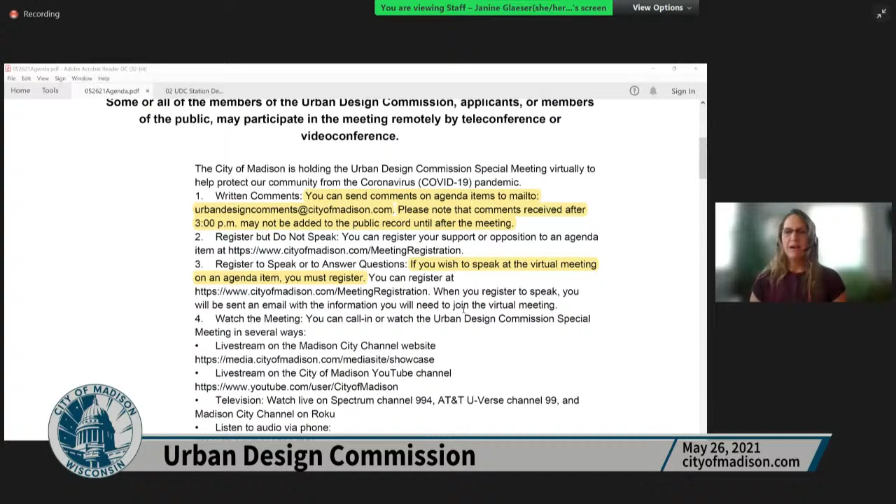At this point, I forgot to share the agenda, and I'll do that. There's one thing before I continue I wanted to tell the public: you can send comments on agenda items to urbandesign@cityofmadison.com. Please note that any comments received after 3 p.m. the day of the meeting won't be seen until after the meeting. Lastly, I wanted to remind the public, if you wish to speak on an item, try to register as far in advance as you can. We understand sometimes it takes a little more time to get logged in, but we certainly appreciate that, to make sure we can catch a registration and let you speak your comments for any particular item.

But jumping back to the agenda, I had mentioned item number 2 and 3, and item number 4 is 3330 Marsh Road. It's new construction in an urban design district number 1. Initial final approval is requested, and note that this is a permitted use, so it will not go to Plan Commission or Common Council. The UDC can make their final determination this evening.

Item number 5 is 6321 Town Center Drive. This is an amendment to a previously approved planned development, GDP-SIP, for three-story buildings. Initial final approval is requested, and a reminder to the Commission that you did see an informational presentation on March 31st. Your feedback is incorporated into the staff report. If it receives at least initial approval, it will go to the Plan Commission on June 7th and Common Council on June 15th.

The last discussion item for this evening is 216 South Hamilton Street. This is a new development in UMX zoning. Initial final approval is requested. A reminder to the Commission that they heard an informational presentation for this on March 31st, and those comments have been incorporated into your staff report. This would go on to Plan Commission on June 7th. One item of note for the Commission, there is some public comment that was recently added to the Legistar file from the Bassett District of Capital Neighborhoods. That's all I have for this evening.

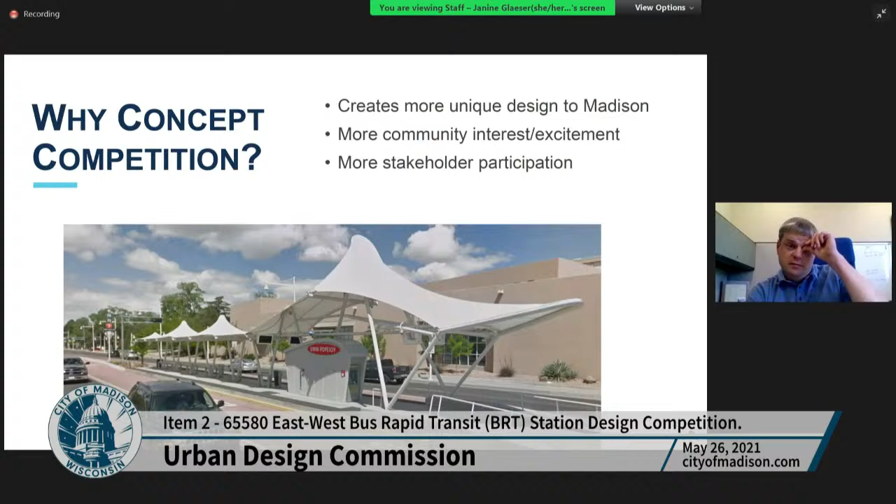So we released this back in March. Overall, we received 61 design submissions. From there, we went through a screening process with our architect and engineer to make sure that the designs could reasonably be adapted to be constructible, as well as within our budget. We did provide a budget for each station with our call for designs, and our design consultant did evaluate those and screen many out because of cost concerns.

From there, those 23 designs we did post on the website and solicited public comment. We also sent it to a couple different stakeholders, including UW and the city's Historic Preservation Department, and received feedback from them. Ultimately, the public feedback was quite successful. We had over 2,600 comments from the public, which was really helpful, and I think showed a lot of engagement in the process.

Those comments varied from 'I like it' or 'I don't like it' to more nuanced descriptions of what particular elements they did and did not like. So as staff, we compiled and assembled, based on those comments from the public and other stakeholders, a report that scored the different designs based on a list of criteria that we had set at the outset of the competition, again taking into account a lot of those public and stakeholder comments.

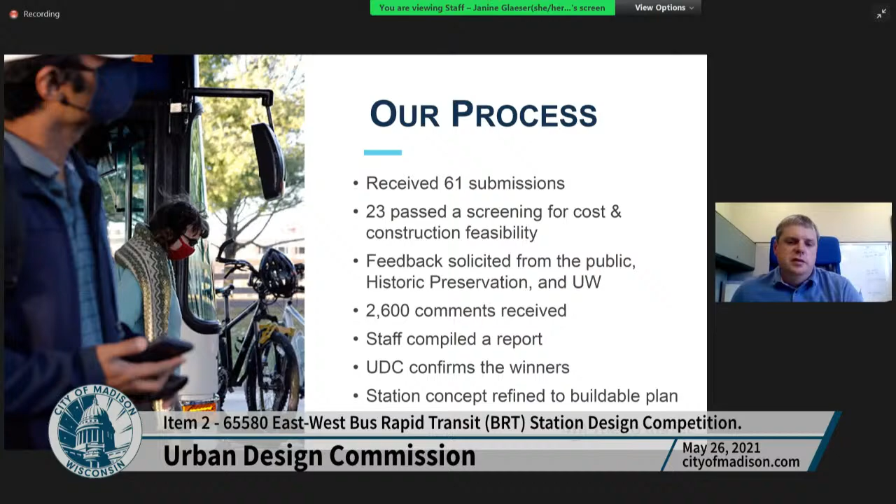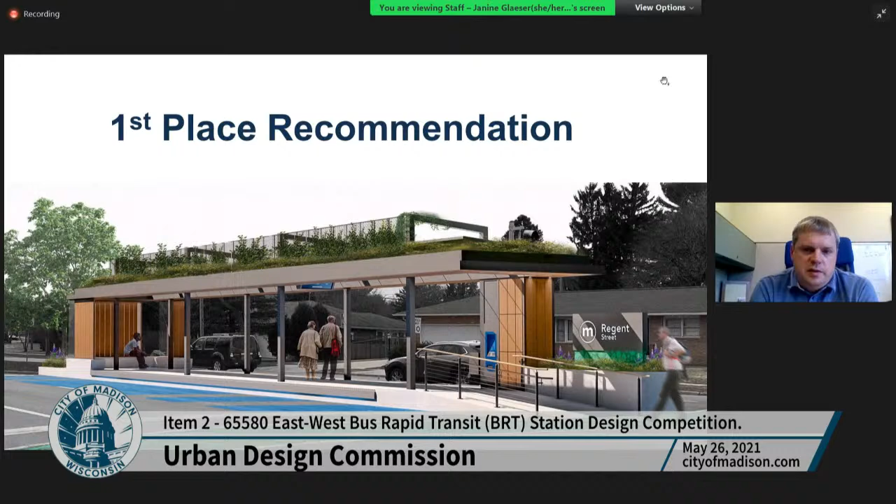So with that, I can go through the recommendations. This is our recommended first place design. Folks liked it because it was unique, especially with the roof elements and the interior elements, which you'll see in another picture. It also provides shelter for waiting passengers at the end from wind and rain on the walls.

If you go to the next one, it provides a pretty unique kind of greenhouse in the middle that allows us to place our real-time screens up there, as well as provide opportunities for public art. Both this one and another have some limitations. There's a lot of greenery shown on the roof and sides. There will be some limitation on what we can do on that front, especially on the roof, because the roof structure can only support so much, but we will try to adhere to the original intent as much as possible.

The second place recommendation is this design. If we can go to the next slide — this is a bit more simple, which many people liked. It provides nice, simple, clean lines with the wood paneled ceiling, and it's just an open concept that allows people to navigate cleanly around the station design.

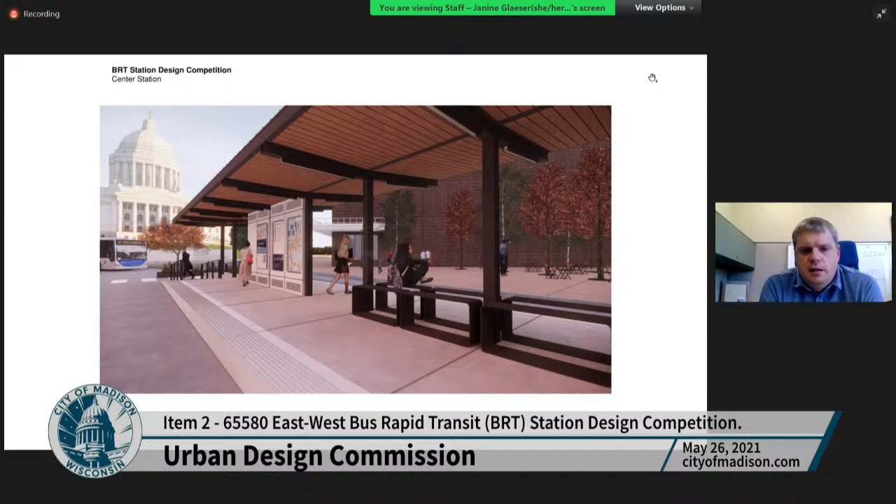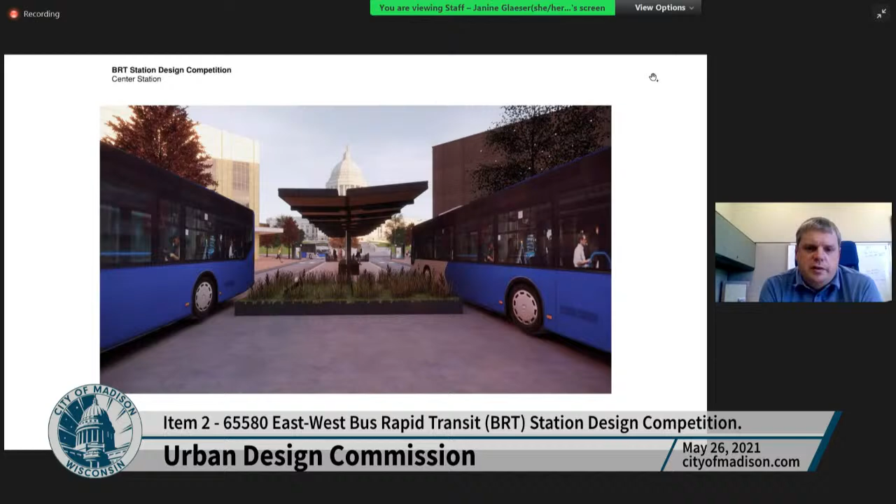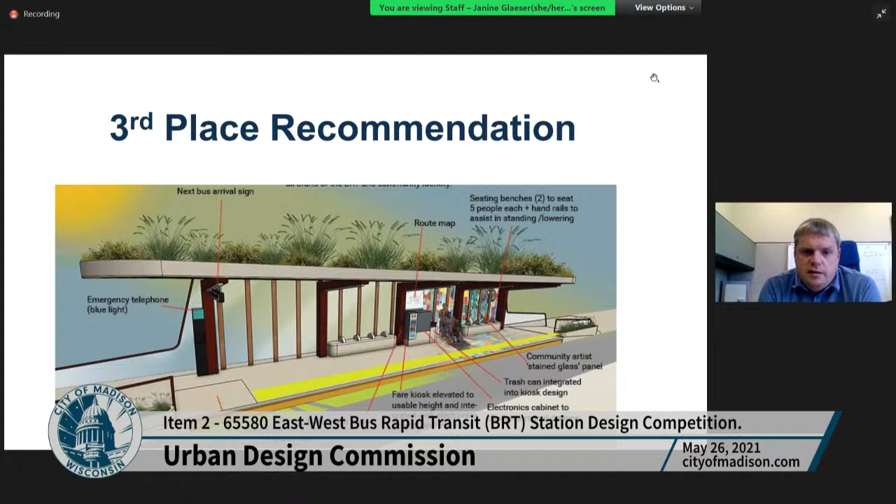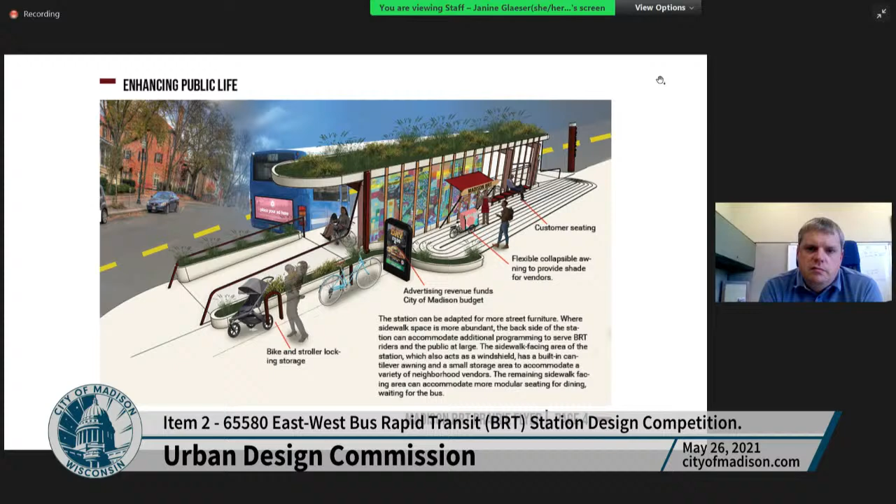Go to the next one. It does have some elements of greenery at the base of the station at the end, but nothing shown on the roof in this particular example. The third place recommendation is this one, again with green roof features and glass panels along the back that have the opportunity for community artworks. A lot of people really liked the colorful elements here and the unique shape of the roof and structure, as well as those community art panels. There are some limitations again on what we can do with some of these panels, just because of maintenance, but certainly some elements of these designs we could carry forward.

So with that, I'd open the floor for discussion, any questions any of you have, and then ultimately ask that the UDC move on a recommendation, even if it's not the staff recommendation, so that we can move forward with our design. Okay, thanks Justin. There are no more speakers registered to present, so I will ask the commission if they have any questions or comments for Justin.

Rafiq: So as I understand it, we're just making a motion for one of the three? Yeah, we can make the request that we accept the report and the order in which they've prioritized the contestants.

If you or others on the commission don't agree with that order, then we would have to discuss that and make a motion that ultimately the majority would agree with for a different order. Well, yeah, if that was the case, I just want to make sure — but I was going to make that motion, but I see another hand up, so I will wait to see what he says before I make that motion. Okay, thank you. Russell.

Any thoughts or concerns about that? There were many comments around that, and actually that was the first place recommendation here. It's a little hard to see, but it has a more enclosed end there. Essentially it's the size of one of our bus shelters and is similarly enclosed on three sides, providing some weather protection.

Ultimately, we have some physical space constraints for ADA access and maneuverability that make it difficult to enclose the entirety of the station. But as staff we feel this provides a fairly large area that would be relatively weather protected. That's a reasonable solution in this case.

Thank you. It's my understanding that when a winner is selected and as we move through these, there will necessarily be tweaks and modifications to bring it to a final design, and that will come back to our commission. I know there was some question on that, and Janine may have something to weigh in. Chair, is it all right if I speak? Yes, please.

So the city attorney did review this, and the Urban Design Commission has not reviewed other bus shelters. These are technically placed in the public right of way, whereas the projects we review are within a property boundary. Therefore it was determined that the UDC would not review the final design. However, I would be happy to report back to the commission with details on what that final design looks like, just as an FYI.

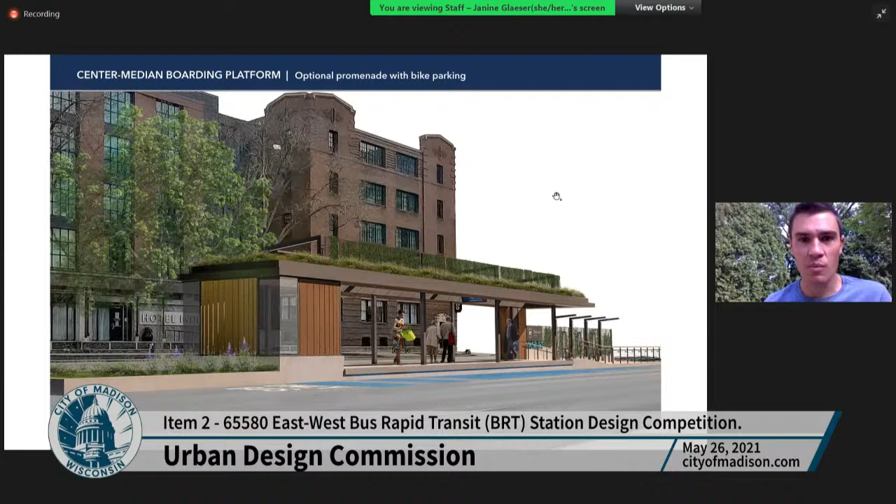Thanks, just one comment looking at the first place recommendation. It doesn't seem like the covered roof area is as deep as some of the others — there's actually a pretty significant opening through the roof, or what's perceived as the roof. I wonder if that's enough coverage from rain and the elements falling down, and maybe something to look at closer if that moves forward as the preferred concept.

Yeah, so in this case, this center area is covered with glass or some Lexan or similar material. The intent is that it's essentially a clear glass and/or polycarbonate ceiling, so it's still protected from weather but does allow light through. Gotcha, thank you.

Tom. Uh-oh, Tom, we're back to— we can't hear you. It's futile. Tom, can you email me your phone number? I had to do that. Tom, you're muted now because it was a little incomprehensible.

While we're trying to work that out with Tom, anyone else have any comments? Christian? Yeah, my first take on these ones with the green roofs was...

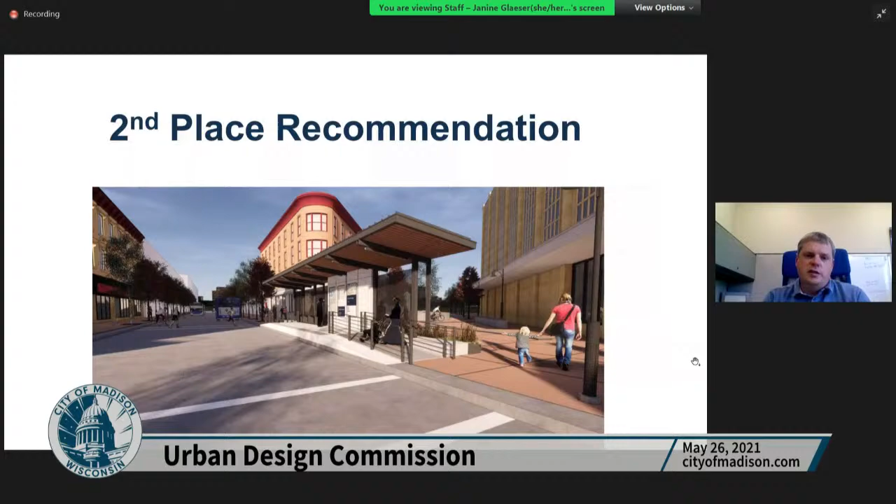When we went through and assessed these designs, so many of them had green roofs that we didn't want to screen them out just because they had one. Our general assessment was whether the green roof was an extremely integral piece of the design, or whether it could generally function in much the same way without it. In this case, we felt that was true - without the green roof there's certainly some visual change, but overall the station still functions in much the same way.

On your second question, it's important to note the stations are about 60 feet long. On the curbside locations, they're about 10 feet wide, and in the center stations, anywhere between 12 and 15 feet wide. But to your point, in almost every circumstance where we have a center platform station, there are dedicated bus lanes on either side, so there's no general traffic adjacent to those stations. That's one way we control for spray and other concerns about being close to active traffic.

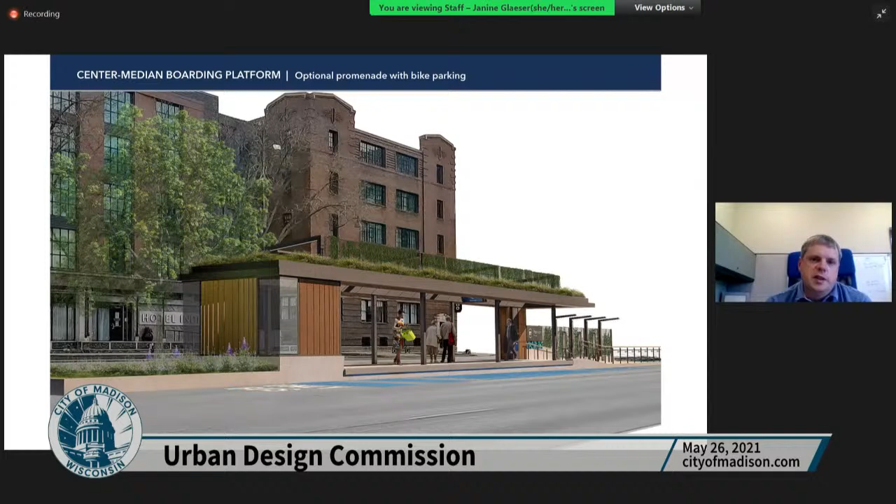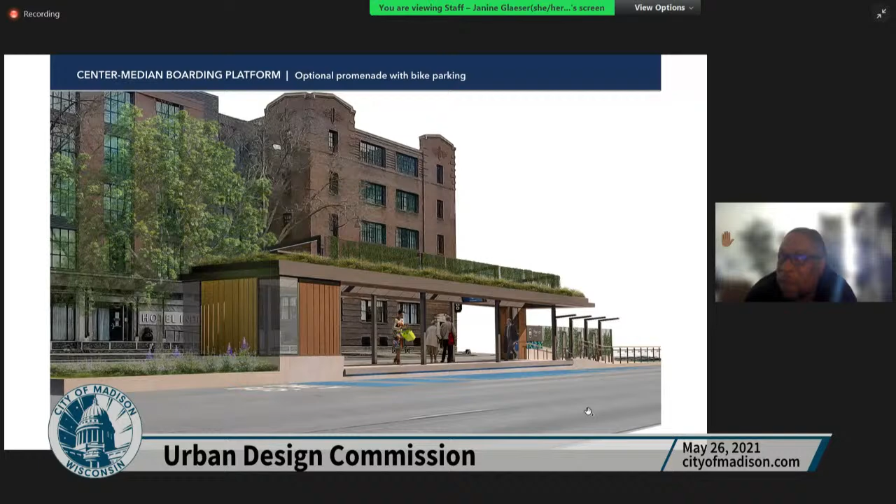Somebody made a comment about the weather and enclosures, and I think if you've ever caught a bus in Madison, rain or snow, unless it's fully enclosed, it doesn't matter - you're going to be cold and you're going to get wet. So with that being said, I'd like to make a motion to accept this report, in the order that they've done.

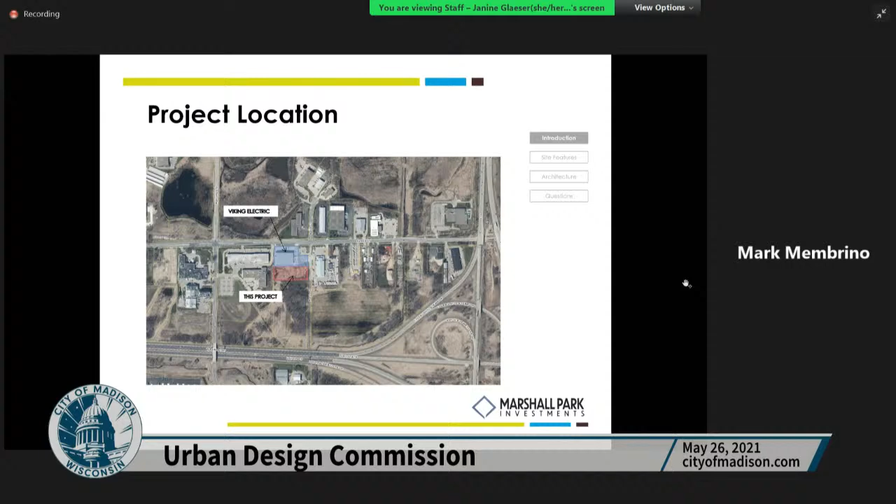Here's some recent experience. This is Viking Electric, which is directly in front of our subject site. And this is IKM, which we are finishing up. Right next to this, we're also building another industrial spec building. So we have a lot of experience in this area, although this is a new project for us.

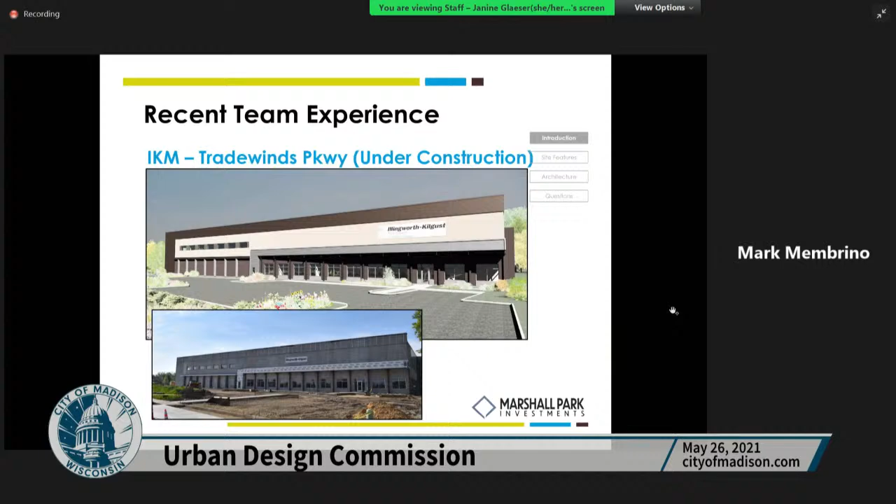So what we're trying to address here in the market is the demand for small contractors and new startups that desire to get out of their house and get into their own space. I think that's true for a lot of people these days, but this design really serves those kinds of folks.

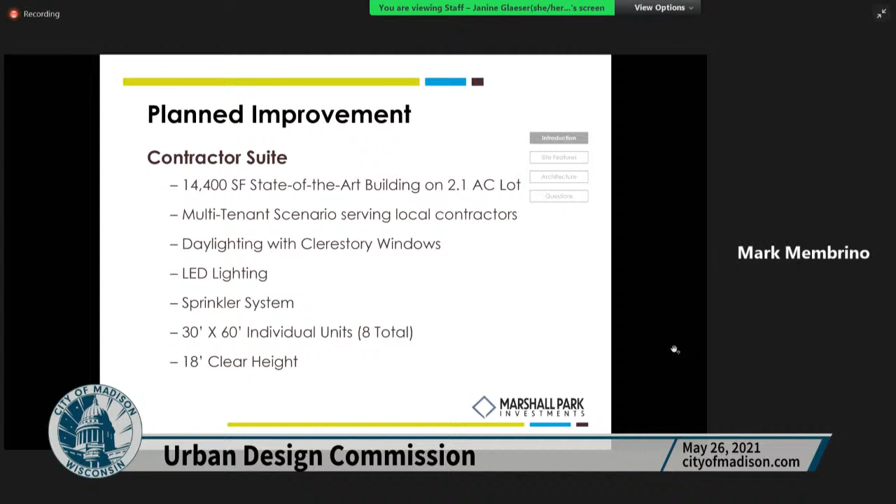It's a building that includes 8 small and affordable suites that are clean and very functional for mom and pop industrial users. We've included daylighting and clerestory windows with LED lighting to make the spaces well lit and inviting. Finally, there's clear heights of 18 feet that allow for vertical racking, and the building's protected by a sprinkler system. So all in all, we feel like we're bringing to market something that small contractors could just turn the key and go to work, with an office and a small bathroom included. I'll be followed by Gary Blazek, who will cover the site plan.

Thanks, Mark. Some of the site features: this is just adjacent to Viking Electric, just to the north, which we came to you about a couple of years back. So this complements the site. That site was split into 2 lots back then when we were doing Viking, so this is the remnant lot that we're trying to build on. This lot and the planned use hits all compliance with the zoning requirements. It's limited industrial. The stormwater features are shared with Viking Electric - I'll show you that on the site plan. We propose landscaping and we accommodate a buffer zone for the wetlands.

Here's the overall site. The top part shows the Viking Electric site, and the bottom is the 3330 Marsh Road site we're looking at specifically, with the contractor suites there. The stormwater is to the back of our proposed building, and that's shared between both the Viking Electric site and our site. There are wetlands just south of our south property line, so we are staying away from that. We're providing a 75-foot buffer between the parking lot and the south lot line so that we aren't infringing on any of that. There will be just some grading in some of that area too.

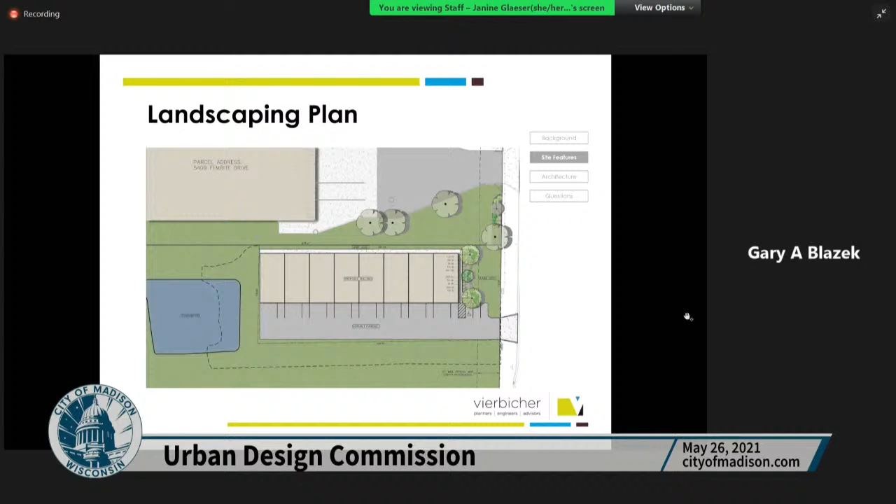In the Viking Electric site. Next slide. I think with that, I will turn it over to Bob. He'll talk a little bit more about the architectural features of the building.

Thank you, Gary. This is Bob Bouril, and we have a linear building. It's 240 by 60 feet in length, and the narrow portion faces Marsh Road. That Viking Electric building on the north end, which you saw in the previous site plan, is about 30 feet high. This one is about 19 feet high.

So we did some enhancements. It's going to be an engineered metal building construction, so we have some horizontal structural girts that wrap around the building. We're putting some clerestory windows within those girt spaces in the upper third, and that carries around the front and north facades.

Then on the south facade, as you can see in this shot, we have our garage doors. They're 14 feet. Every tenant space gets one, an office, and a bathroom, and we did a few enhancements here. We added some stone to the front, a horizontal accent band out of a fiber cement product, and wrapped that around the corner. The entry doors are going to be in a slate blue color, with metal canopies at each door. Next slide, please.

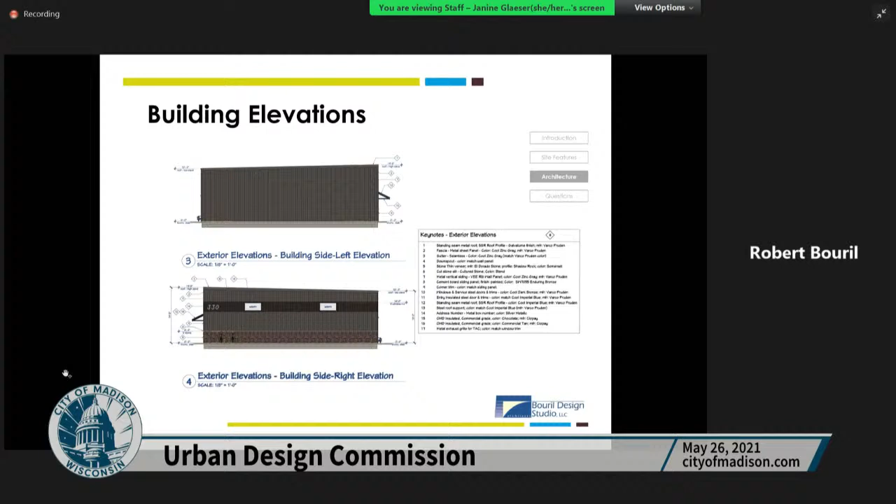Here you see the rear elevation, which faces the stormwater retention area, and then the front that faces the road. It's a mono slope, so the water pitches to the north end and is captured and goes back to the stormwater area. Next slide, please.

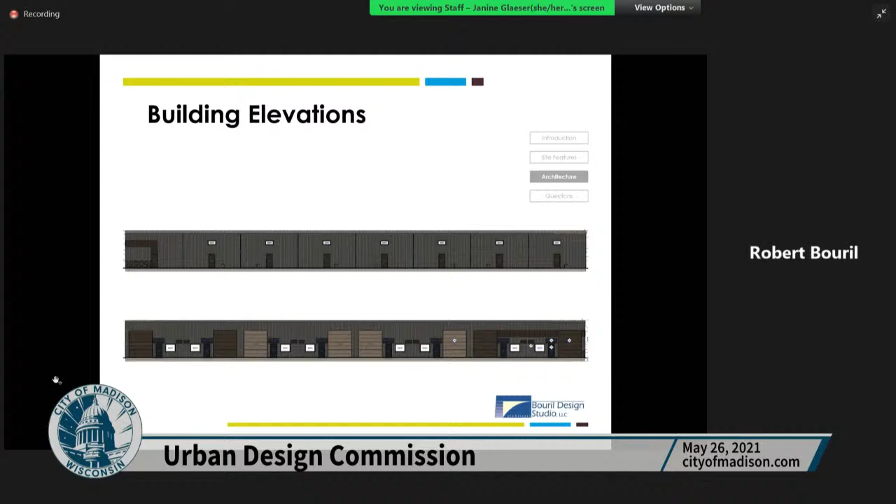The north and south elevations. There's an exit door for each tenant and clerestory lighting on the north, and then on the south we have our garage doors, main entry, a little bit of color change with the garage doors just to break up the facade. And next slide, please.

Let's see, let's keep going. Okay, just more of a people eye view. Next slide. This is wrapping around to the north end. This is the facade that faces the Viking Electric building. Next slide.

Here's the south elevation. Basically, there's contractor parking, turnaround, loading and unloading space here at the garage doors. Next slide. Another view. Next slide.

Front elevation. The landscape plan is per the previous one that Gary had. The Viking project's going to have some Kentucky coffee trees on the north side of this building, and then this gets an assortment based on that landscape plan. Next slide.

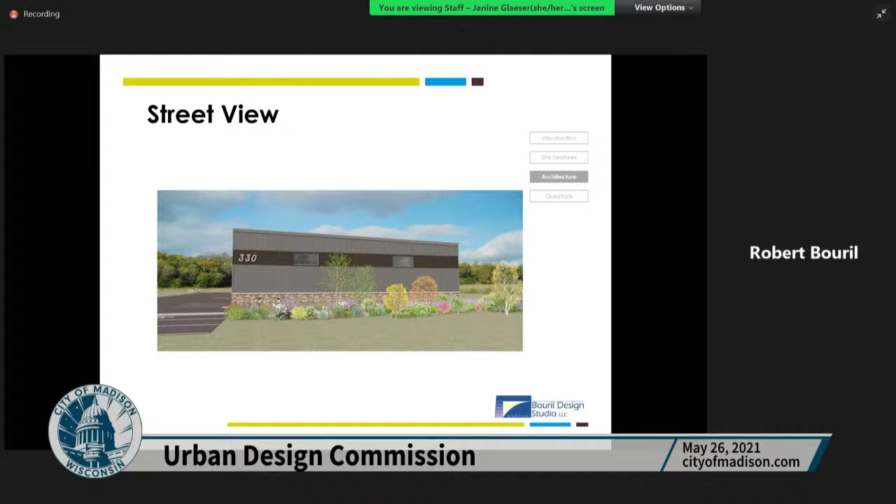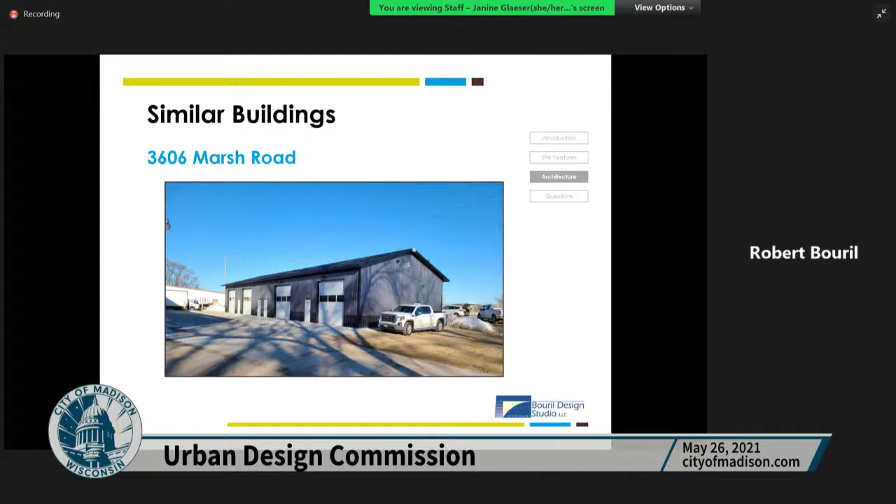These are a couple other projects that have been approved in the same urban design district. Next slide. Another project that was previously approved. Next slide.

Our colors for the garage doors, we're keeping with just a fairly muted, warm color scheme, the chocolate and the commercial tan. Next slide.

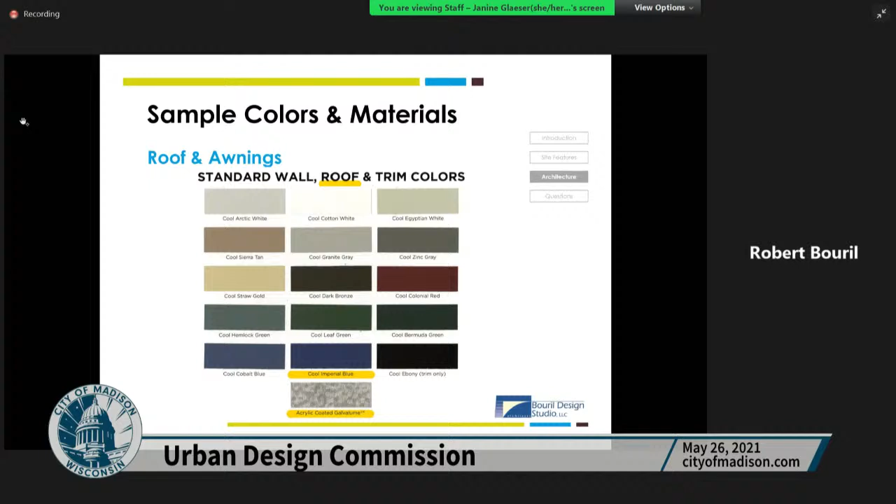The roof is galvalume. That's really not going to be visible from the street. Next slide. And the cool zinc, here's an example.

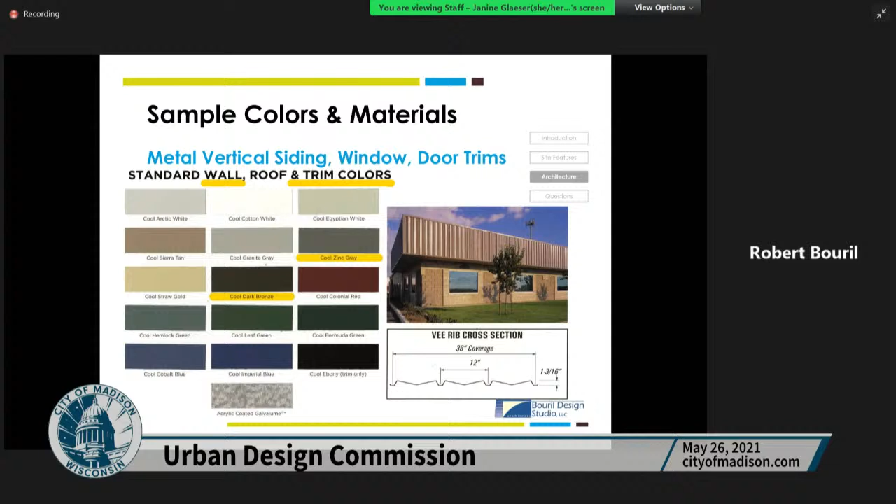It's a deep V ribbed metal panel. It's got a lot of shadow line with dark bronze trim. Next slide. Here are the actual colors.

All right, there are no other registrants to speak, so I'll open it up to the commission for questions or comments.

Russell. Thank you for the presentation.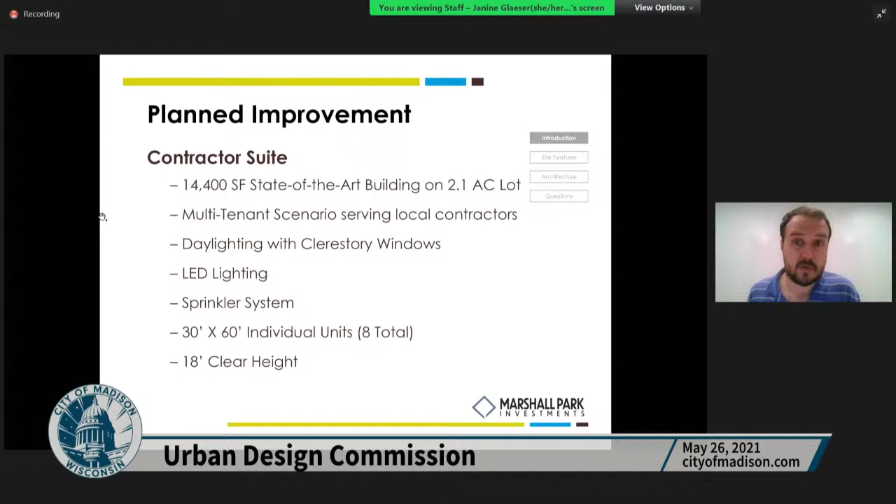I think your treatment of the building, the materials, and the design for this type of building looks nice to me. I think that was careful selection of some of those elements. A couple of things I would like to see and understand is the integration of existing mature trees on the site into the landscaping plan. The last time I took that interchange, there is still some buffer out there from the interstate from a lot of those trees. So I think they're an asset that the project would get value from keeping and integrating.

The roof plan isn't very clear on this project. I would imagine there are rooftop mechanical units, and the drainage from the roof is not really clear. So I guess those are just some items that I think we'd like to see in a final presentation. Thank you.

Okay. Any information you can share with us with regard to trees? Because they are asking for a final approval tonight.

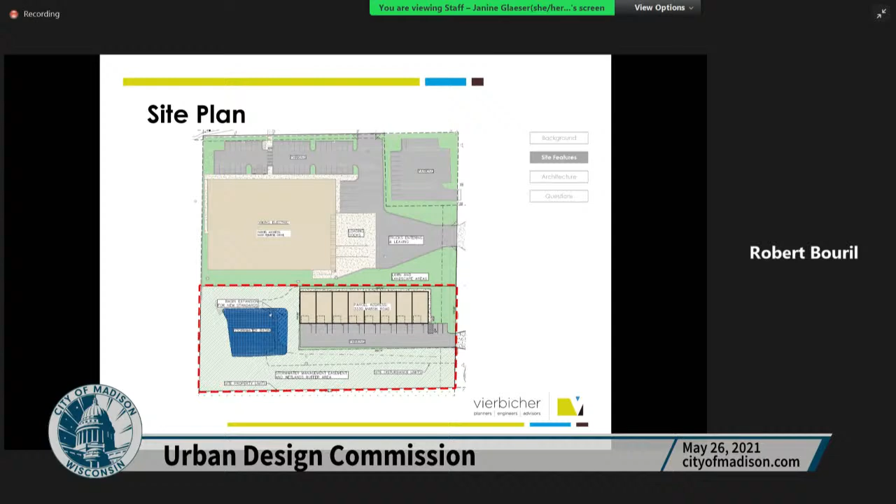I can address the roof design. This is Bob Bouril. Can you hear me? Yes, go ahead. Okay, so there will be no rooftop units here.

Each individual space will have a wall-mounted gas unit heater internally, so basically we'll have a side vent going to the outside on the side wall of the building. So nothing up on the roof.

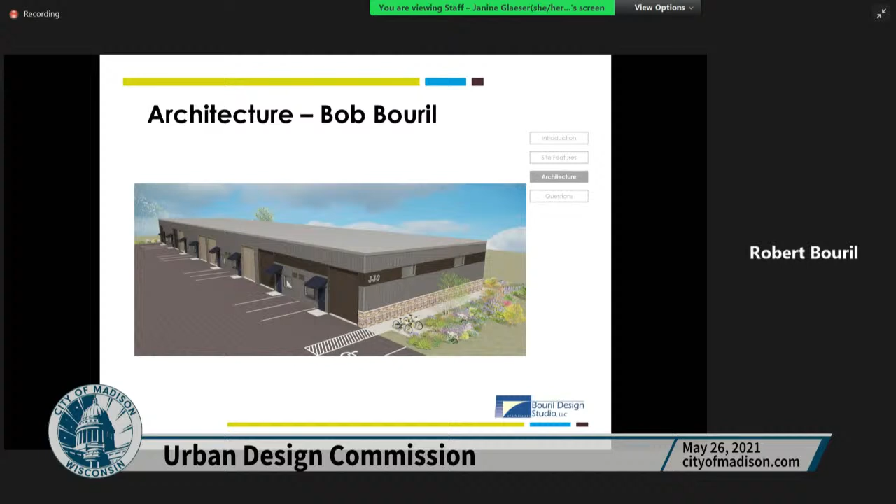Yeah, just to address Russell's comment and close the loop, although I don't think the species were documented in the submittal, it did appear like most of the existing trees were willows and not of significant value like we've seen in some of our recent projects before UDC.

Thank you. I'd like to, before I call on Christian, make sure the commission brings their attention to the staff report and Janine's request that ultimately for approval, we would need to make a finding that metal panel in this case is an appropriate use of materials on this building. You can see a little more explanation on that in her staff report. Christian.

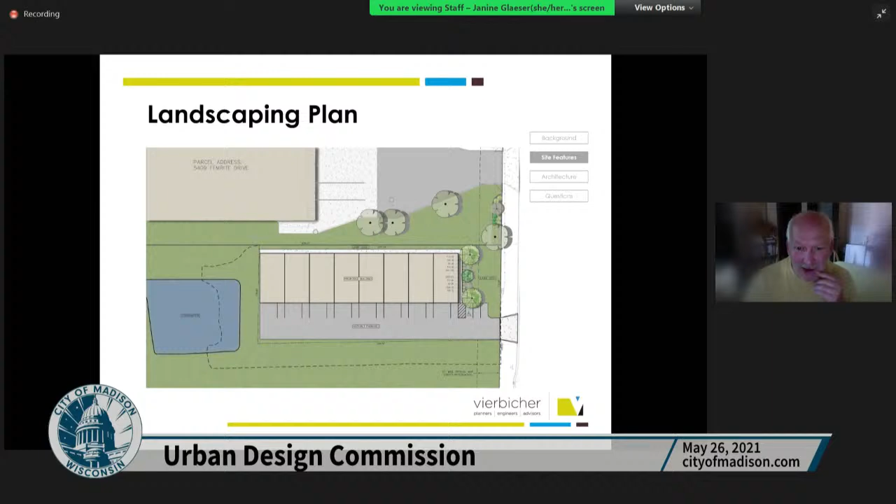Yeah, just to follow up on the drainage questions, and forgive me, I'm not an architect, I'm not quite as adept at reading these plans, but it looked like there were dedicated lines that came from the Viking property and fed into this stormwater basin. I had trouble parsing that out on this project. And I wondered for the parking lot, what is the nature of the drainage to that stormwater basin?

Is it just gravity, or is there sewer lines in the parking lot feeding into the stormwater basin, or are we letting the slope and direction take care of itself?

Yep, this is Gary. The parking lot will drain from the building to the south, and there will be a swale designed to catch all that water - essentially a small ditch that'll drain it back to the stormwater basin. That'll help with water quality, all going through vegetated swales and vegetated grass down there. So it's really a simple system: gravity sheet flow off the parking lot to this swale, and then the swale back to the basin.

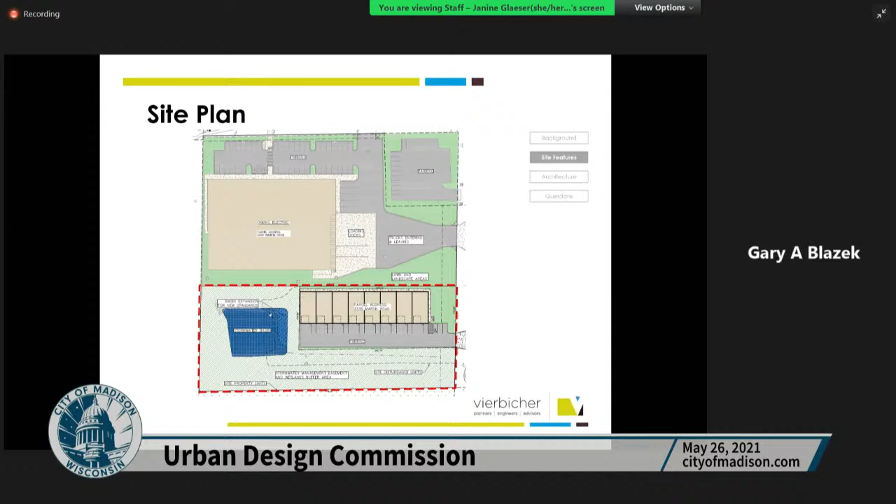Okay, I had one other question on the building. You talked about the natural light and the clerestory windows, but I was curious why there isn't any on the west end of the building. It seems like that unit is really getting short shrift, and all of them in general. The one closest to Marsh Road is going to get the best light, but the windows on the north side are so small. Is it just cost prohibitive, or just not felt like it was needed to possibly have something on the roof? That seems like the obvious place to let the light in.

Sure, I can address that, as to our design thoughts on that. If you go to one of the perspectives where the contractors enter the building, each contractor will have an office, and we provide a sizable window into the office. That's really where they're going to be spending their time. The back could be shop, warehouse, storage, but every unit does get at least one clerestory back there, even that west one. So where people spend the majority of their time, they will have a large office with a direct view to the outside.

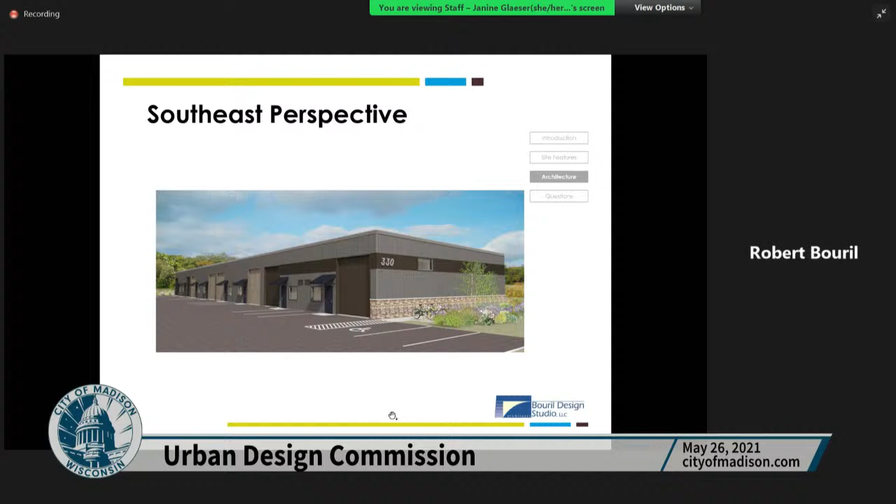Well, there is a precedent for other buildings that have been approved that are similar type construction in this district. I guess we're being asked to make a comment on the part of the UDD acceptance of metal panel as exceptional design merit, and I think we've made that finding in the past.

Chair, may staff jump in? Yes.

So kind of just repeating a little bit of what Cliff already said, this is the current text as it exists in the Urban Design District guidelines. The commission has found in previous projects that metal panel is acceptable, but it is up to the applicant to provide some reasoning why that is an important part of their design and why it makes it successful. Staff did work with the design team to look at some alternatives to add more variation to the design, so the commission can make a determination that it meets the exception or not. It's up to you.

So then my follow-up question is, I understand that, and I'm not saying that this does or does not work or should not pass, but the exceptions are based on exceptional design, and this program or this type of building doesn't lend itself to exceptional design. It is what it is - it's a rectangle with some garage doors, right? So perhaps it's within the context of Urban Design District 1, an industrial area. Food for thought.

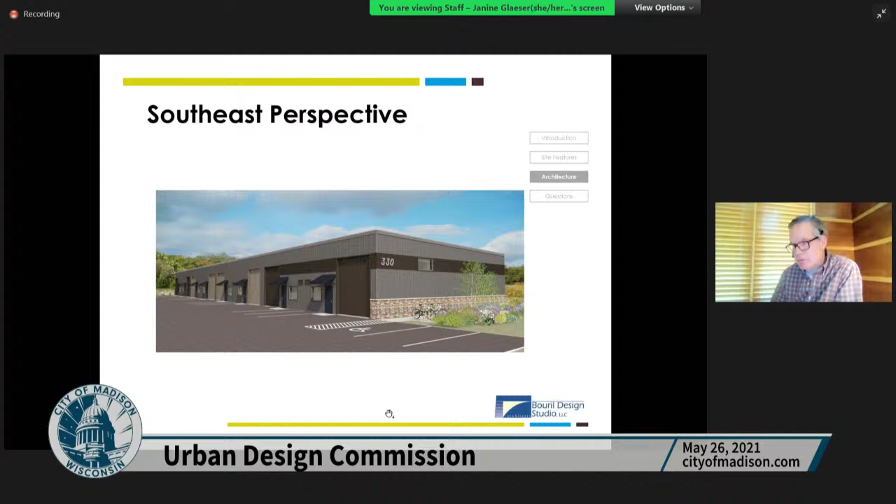I believe we have, if I'm not mistaken, Janine approved a few on the side of the Beltline in the past few years with metal panel. Is that correct? That is correct. There were some previous examples. I can forward those slides that showed something similar.

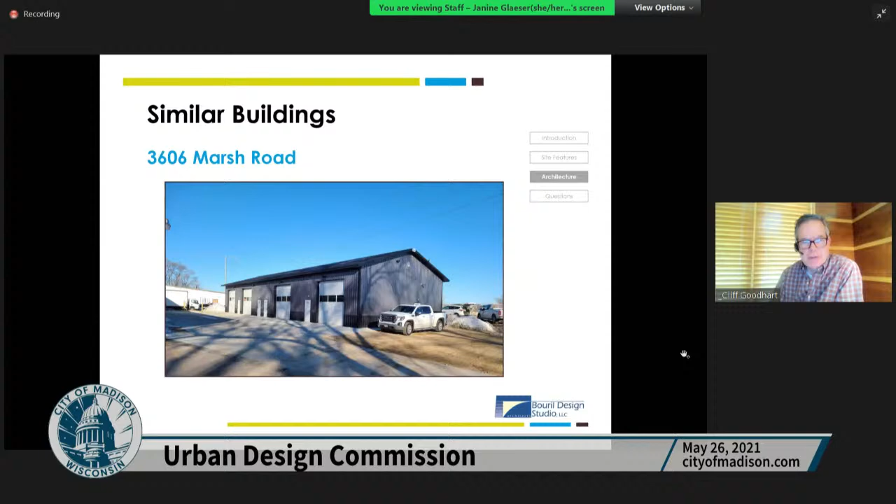Yeah, and if you look at the previous examples, I guess I would say that the project before us is a little bit more true to an industrial building use, and it's a little bit more honest than some of the agricultural and sort of residential forms that have been approved in the past. This is kind of a nice, clean industrial building. While I have the floor, with the exception of that rusticated stone base, which is driving me nuts. And I think that if you're going to do something like that, it should just be a dark gray stained CMU or a dark brick or just metal panel.

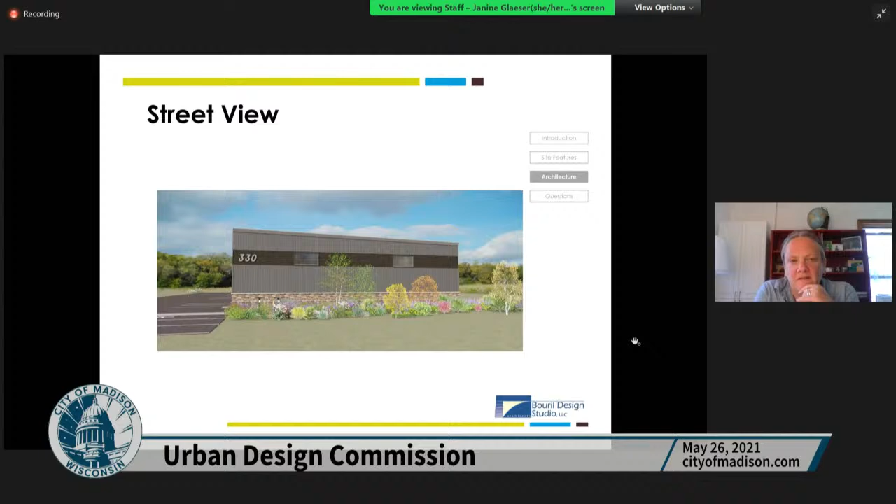Let's see, Jessica and then Lois. Yeah, I wanted to say that it looks like the detailing with this system is nice. The way it's trimmed up at the top and on the corner in that elevation we were just looking at. I did have a question about cars parking so close to that metal panel then, if you're going to buffer that a little bit, or if you have experience with how that metal panel meets the ground, where snow might be shoved or cars come pretty close to that window. Just curious about that. If you've used this panel before and you know how it withstands that.

Yeah, there'll be bumper guards for the tires in front, so they obviously don't run into the panel. The foundation will be poured a couple inches higher to protect the panel at the base. It's a durable product. It's all framed in steel, so we don't have to worry about wood plates rotting and such.

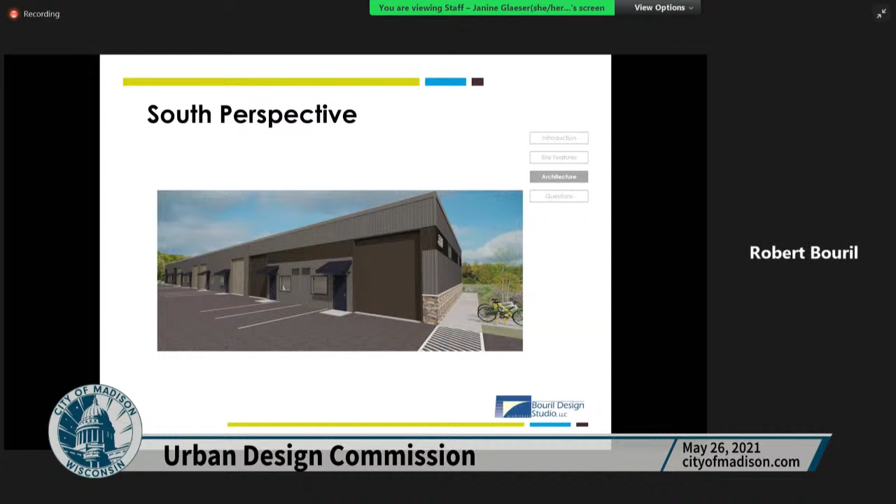Okay, is that it, Jessica? Yeah, thank you. And by the way, we'd be happy to entertain looking at a different masonry product. I'm totally open to that. Yeah, thank you. I think this rustic material is just not appropriate for a nice, clean, industrial-looking building.

Lois, and then I see Rafeeq's back. Thank you. I was going to bring up the stone base. I was thinking more on the lines of a burnished block would be really nice and a dark color. I think the metal panel is appropriate to this site. And I do agree with Cliff that just kind of plain rectangle feels more modern and appropriate in design than the gables and everything that was in some of the other examples you gave.

The thing that Jessica brought up, I was going to bring up as well, but more about salt. When you have a parking lot right up against a steel building, one of the things I think we want to ensure is that the building is going to remain looking nice for a decade or two. And when you're salting near a building like that, that's what's really going to eat up that steel. So I'm happy to hear that you have a little buffer there. And I would almost encourage you to run your masonry along the entire base if it's a real simple masonry, if that's possible, just to make sure that you're not going to have any salt hitting that steel. But I think that it's a perfectly appropriate location for a steel building.

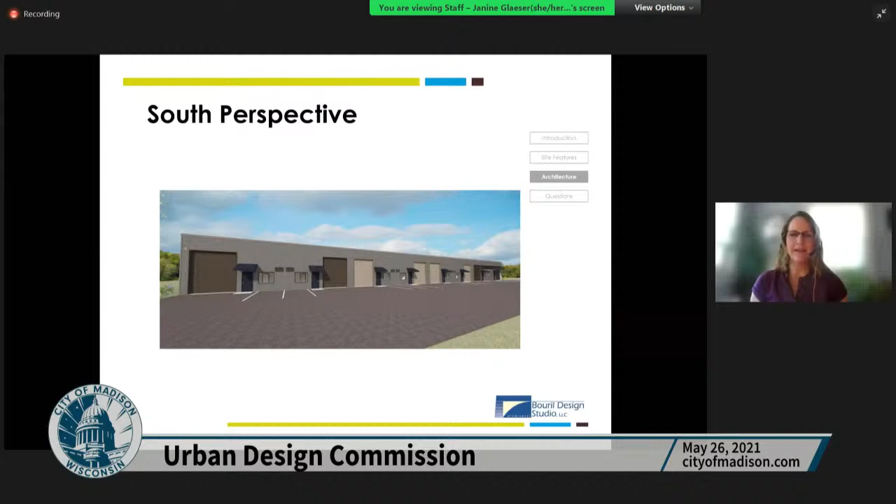The question was about design merit, whether or not the metal is appropriate. My response was that you cited the text as it exists right now in Urban Design District 1, and I was mentioning to the commission to keep in mind that Urban Design District number 1 is very industrial, and to consider those design merit standards in the context of an industrial district. Thank you, I hope that helps.

Any other questions or comments or motions? Well, if that's the case, I'll make a motion since I'm still unmuted. Yeah, you're still unmuted, go for it. I'll make a motion for approval.

Any conditions with the approval? Yeah, I got kicked out so I missed some of those conditions, so I'll let Lois state them since she had the second. All right, Lois, if you're going to second it, I will with some clarifications.

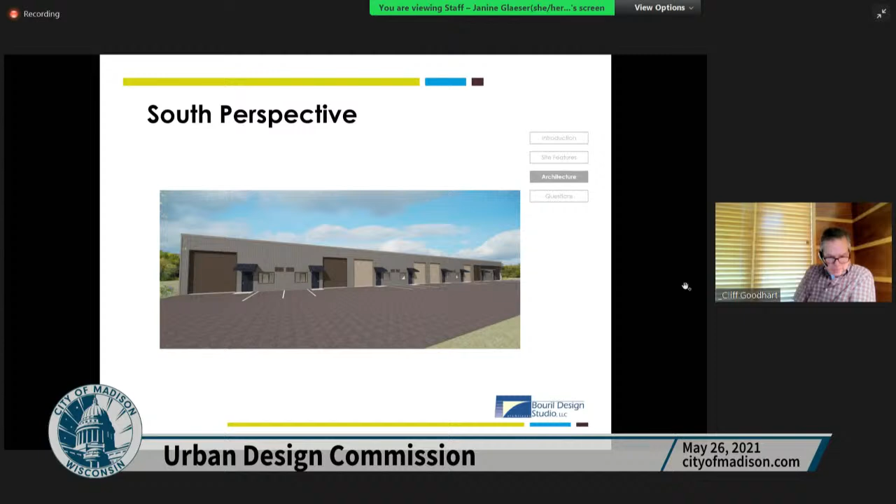Asking for the alterations of the stone base to something simpler and more appropriate to the site and architecture, masonry, and consider—I know the rendering isn't showing it—bringing the steel off of grade a little further than you have it. I don't know how many inches that would be, but just enough that you won't have degradation of that steel from all the salt on that parking lot. Potentially, maybe even bringing the CMU across.

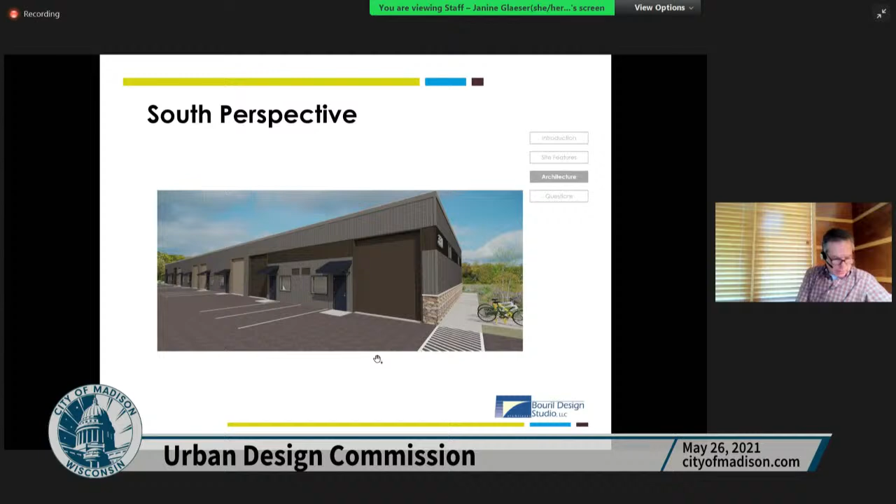Any discussion on the motion? Okay, if I don't see any hands raised, then by unanimous consent, final approval as requested has been granted. Thank you very much.

All right, now we're up to unfinished business. Item number 5, 6321 Town Center Drive. This is coming back to us following an informational presentation we had a couple months back or so.

Thank you. The development team is ready to present on behalf of Kevin Burow. And Kevin, I'll have your slides up shortly. All right, thank you very much.

Good evening, my name is Kevin Burow with Knothe and Bruce, and we are presenting to you tonight for final approval the revisiting of the PUD previously approved for the Town Center Drive area. The site is located directly on Metro Terrace and Town Center Drive, across from the Town Center condominiums and just south of the fire station.

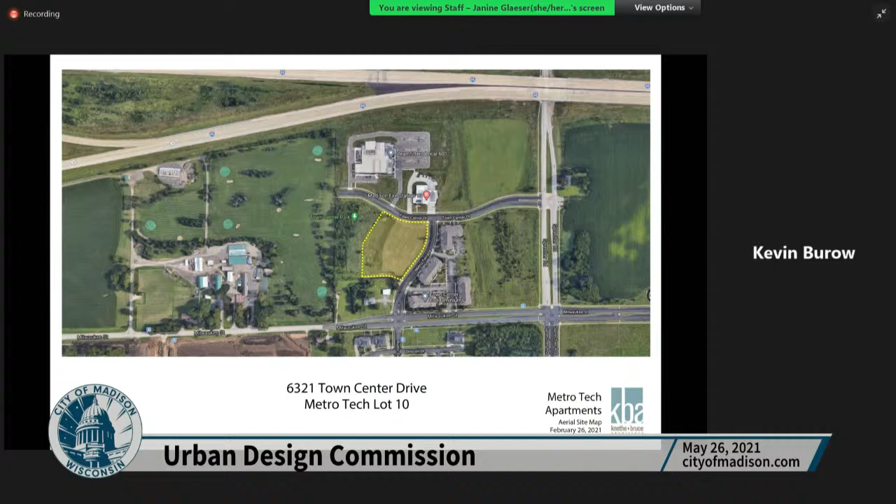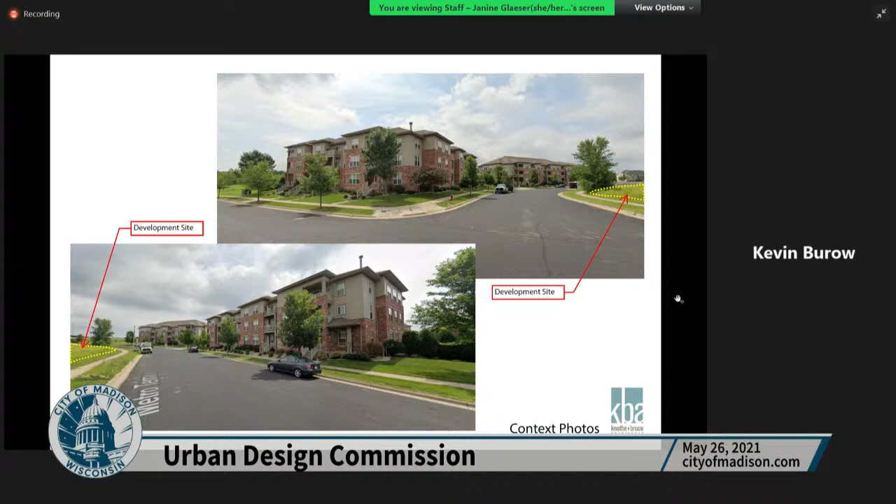The context site images, as presented last time at the informational meeting, show we are surrounded by the condominiums on one side, and the fire department directly across the street. It's currently a vacant field area where we are proposing this development.

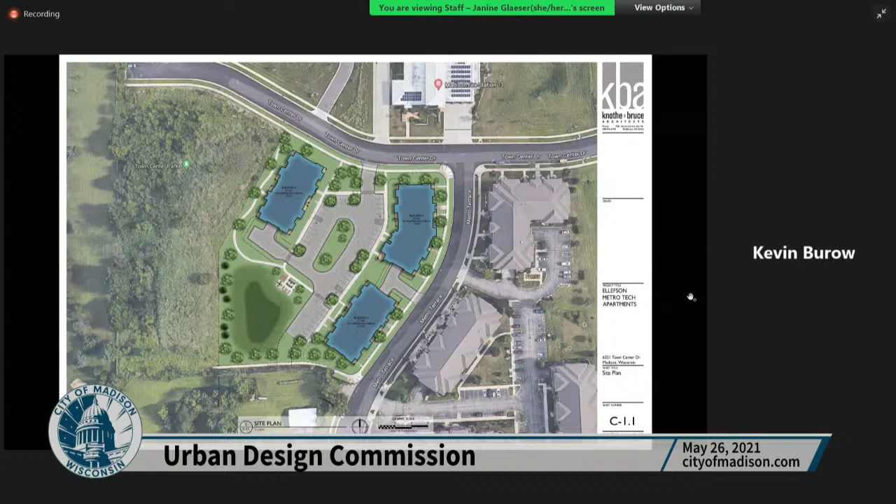As far as the exterior goes, we took your comments into consideration and revised it. Where we originally had brick running up into the gable elements on some features, we've lowered it all down to be consistent, so there's no brick riding up into the gable—it's a much more cohesive image than what you see here.

On the next slide, the main entry feature, shown in the upper right-hand corner, has also been redesigned—we've created a colonnade element with a roof over it and an archway, and added wall sconces on each side, making it a unique feature for each building that signifies the entrance. Just as a reminder, all the entries are located on the interior of the property around the drive areas, not along the sidewalk areas.

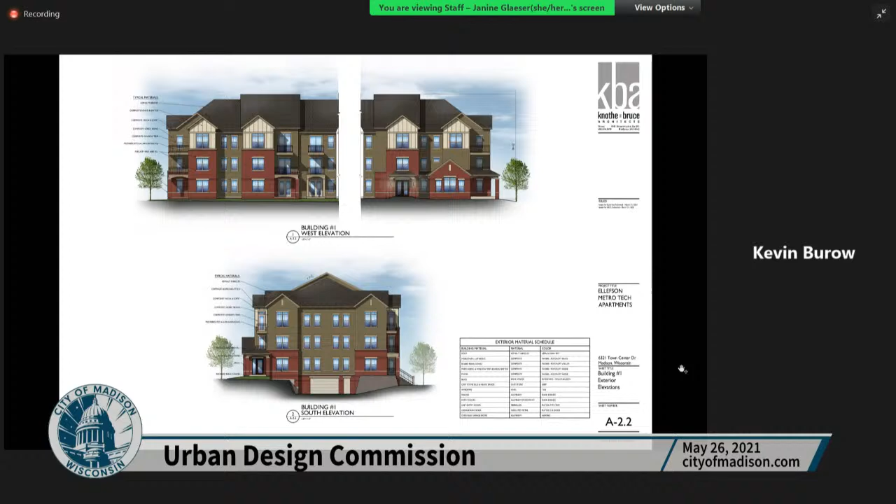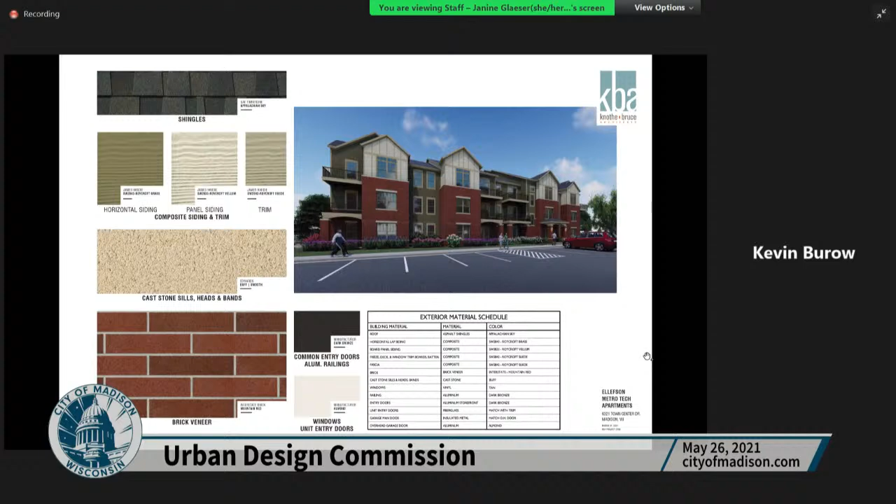So the exterior material palette, as presented last time, is asphalt shingles on the roof, then 3 different colors of composite siding for the siding elements and trim, cast stone base, and a reddish brick veneer, which has a multicolored palette to it.

Next slide. So these are the images along the street, along Metro Terrace, where you're looking at building number 1. These are all private direct entries into units, and there's a stairwell that comes down, which you see the 2 people walking up to. That's not a public entrance, just a resident-use-only exterior stair access point.

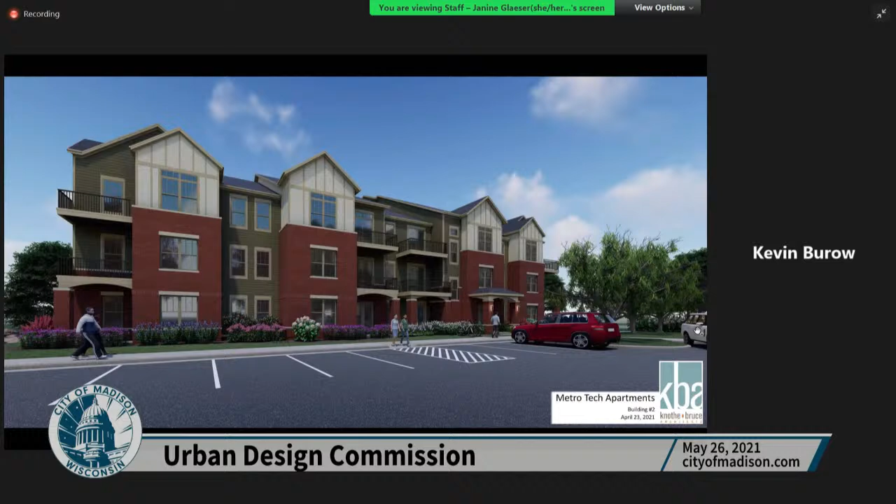Next slide. Here's a view on the interior where you can now see the main entry feature off to the right-hand side, where we've pulled the entry canopy out, put a pitched roof on it, and done the archway unique to that area, and also added the wall sconces. So again, with the brick elements pulled down to a consistent height, we're utilizing this element at the main level to designate the main entry.

Next slide, please. And then just another image, this is on the interior for building number 1, where again you can see how more prominent the main entry is. We've also got landscaping screening covering the private residential areas. So with that, I can open it up to any questions or comments.

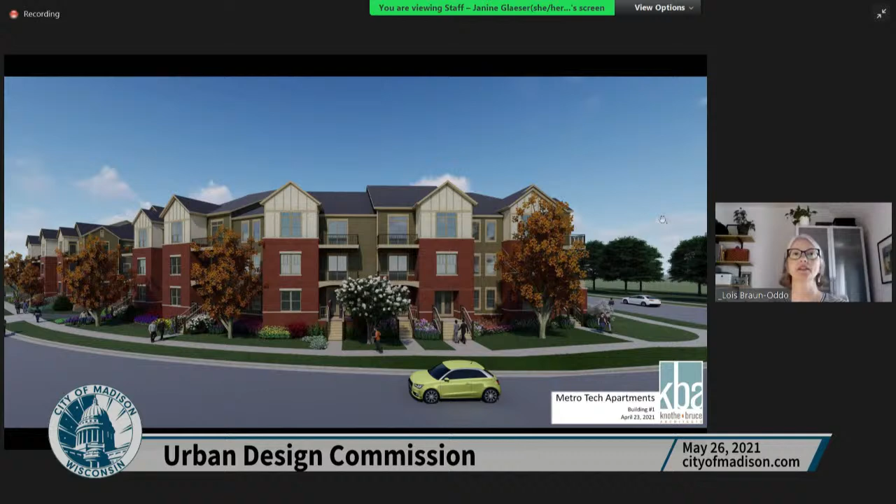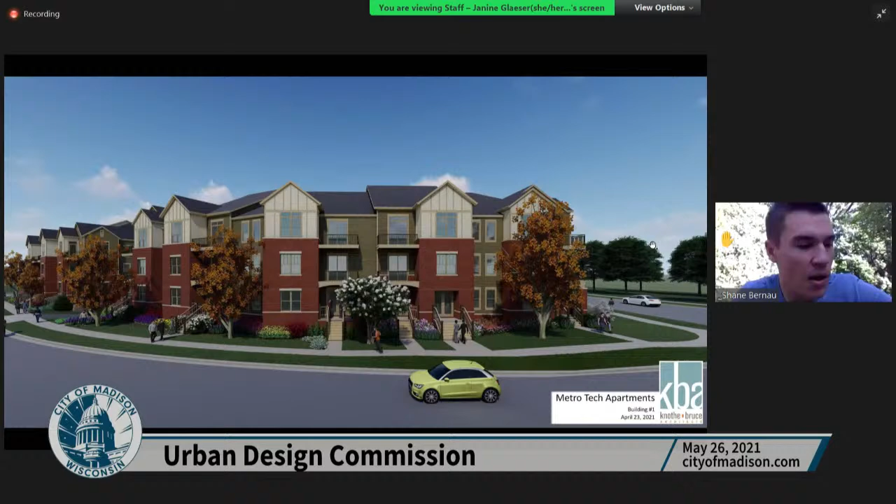Thanks, I had a couple small recommendations on the landscape plan. First, if you look on the west or northwest side of the property and the path that circles around the outside, I thought it'd be kind of nice to take that wavy drift of plants that you have along the building foundation and maybe create a pocket on the outside of the path so it feels like you're moving through the landscape more.

In general, I think there are areas around the site where the landscape and the planting bed edge could be simplified so it's not so swoopy with very tight spaces. More so, I would say along the east edge and that east frontage, where it could probably just be simplified, since the planting bed doesn't really do much or add much to the design with all of the swoops in some of those tight corners.

And then there's like a community patio that's near the bioretention basin. I felt like that area could use some planting design and a little bit of ornamental interest around the edges. It also seems appropriate that it would have a couple bike racks in that area. And I'm going to go on mute now.

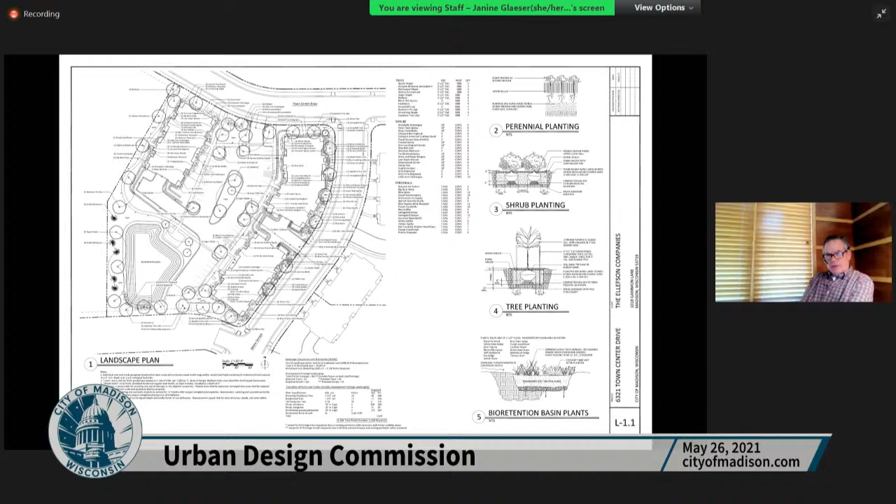While Shane still has those thoughts fresh in mind, I'll ask Kevin if he understands the gist of the comments, or if he needs further explanation. No, I do understand his comments, and I can appreciate them, and we should be able to make those adjustments, no problem. Okay, great, thanks.

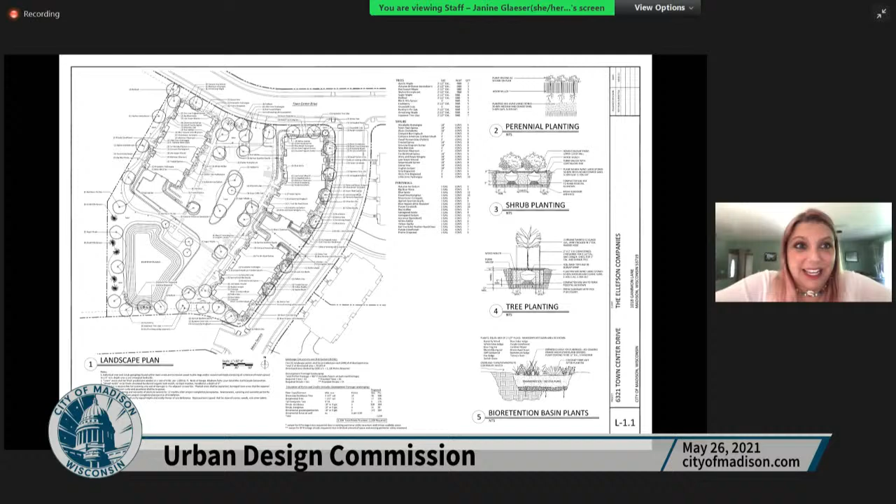I see Alder Lemmer would like to address the commission. Yeah, thank you very much. I really just have positive feedback for the design of this development. I think it's very attractive. It does match the size and the mass of the condos across the street, which is a good thing.

As has already been mentioned, the color palette is really nice, and the materials are excellent selections too. I wanted to share, in case it comes up, that parking is important here. Please don't think about underparking it or reducing the parking in the plan. The roads are kind of narrow over here, so street parking isn't a great option. And of course, you've got that fire station there. The transit here will be increasing, hopefully, but it's not as great as it could be right now.

I did have a neighborhood meeting for this a couple of months ago. I'd say it was lightly attended, even though I think it was pretty well promoted. So I haven't received a great deal of feedback from the neighborhood as far as the design, which hopefully means folks are generally comfortable with it and like it. I'm a very lay person at this, but I did like the landscaping plan, especially the large amount of lilac trees. So that's all I wanted to share.

Thank you very much. Thank you. Any questions for Alder Lemmer? Thank you.

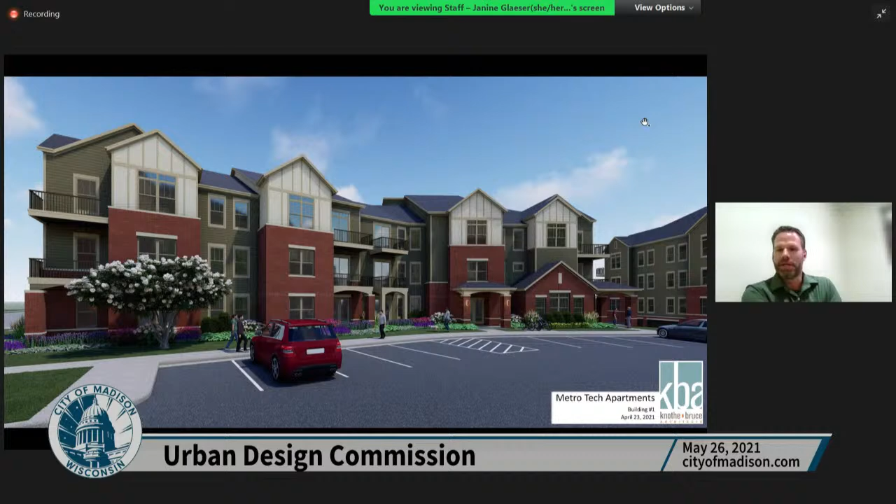Thanks, Cliff. So I agree, this is a really good design, and I would like to make a motion for final approval. I don't see anybody else's hands raised, and I think just by the quality of the design, with the only comment being Shane's comment on the landscaping that Kevin has addressed and talked about.

Okay, is that a second, Lois? It sure is. Thank you. Okay.

Okay, I see no other hands raised. Any further discussion on the motion for final approval? Seeing no hands raised, then by unanimous consent, we've granted the project final approval. Thank you very much. Thank you for your time.

You bet. That brings us to item number 6, the last item on our agenda. And this is another one that we've seen and have provided comment on, and we are anxious to see the final results. The development team representative is Christopher Gosch.

Chris, I'll have your slides up in just a moment. You can start anytime. Okay, can everyone hear me? Yes, we can. Okay, oh yeah, hi everybody.

So we were here, I think last part of March, presenting this infill project down at 216 South Hamilton, across from the courthouse. Janine, you can go to the next one here. So this is a 4-unit live-work project. It's owner occupied. And then there's a small, sort of subscription restaurant that's taking up about 200 square feet.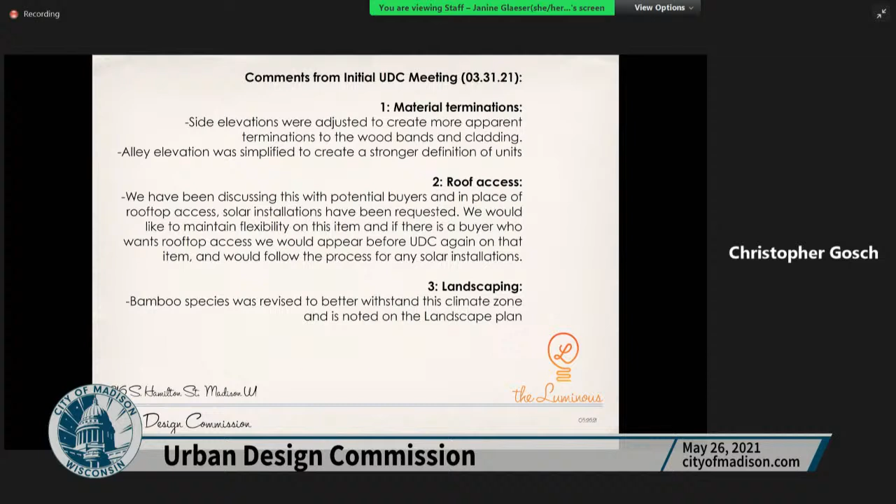And then landscaping, there was a comment about one of the bamboo species, and we revised that to a more hardy species. We did make a slight change to the southeast corner of the building to better reflect the setbacks on the site. I had misinterpreted what one of the rear yard setbacks would be, because it's kind of an odd shaped site. So if we can skip forward, I can walk you guys through.

So this is UMX. Oh, and before I forget, one comment from Janine's summary is that this is going to Plan Commission for the demolition of the existing building. This project will not be heard at Plan Commission. We are compliant with UMX zoning, and we're not asking for any conditional uses or anything outside the existing zoning.

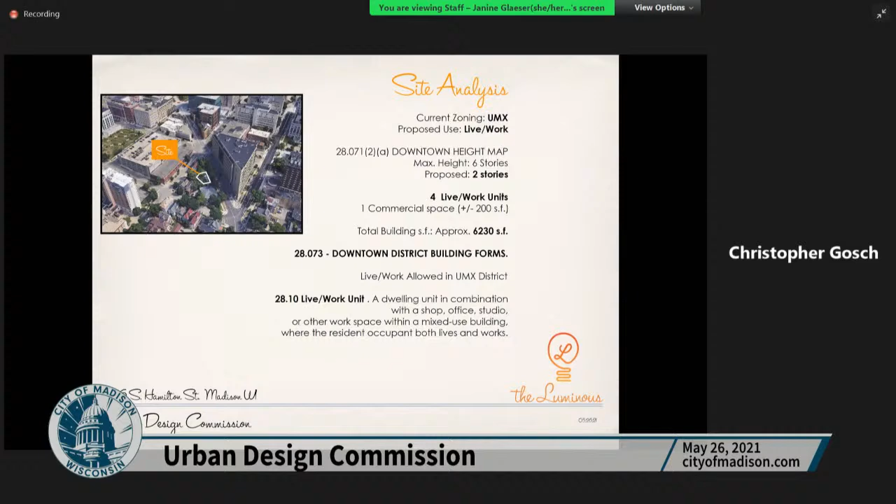So, okay, again, 4 live-work units, 1 small commercial. You can see the site there right across from the courthouse on Hamilton Street. One more.

We can skip that, it still complies with everything. There's the site, and there's the existing property, or existing house, on the site. Okay, so what we...

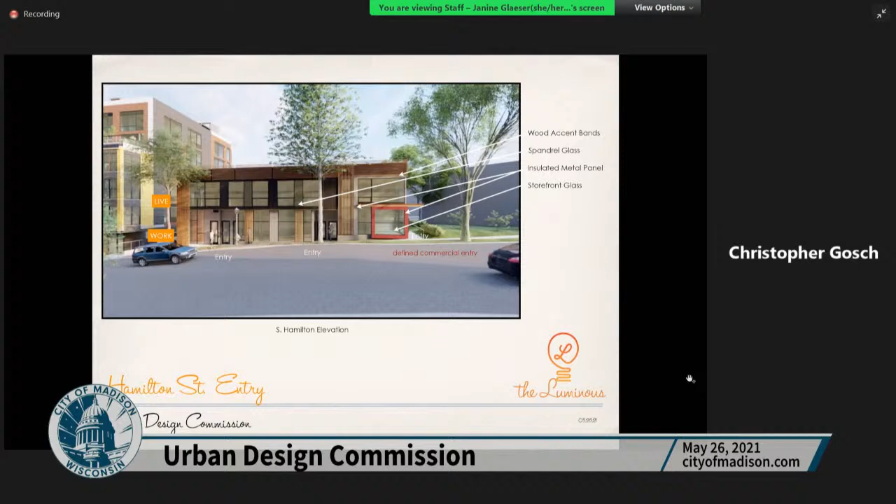We extended the entry on the uphill side towards the Capitol to better define that and to better terminate the wood bands, which we'll see in the next slide. The wood bands on the alley side, we're turning back and terminating everything right there.

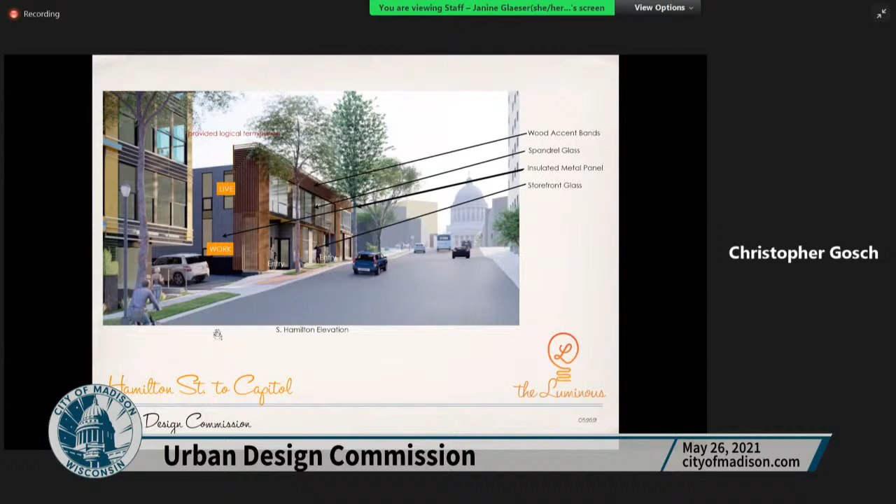On the grade level, the wood bands are just terminating about 2 inches above the concrete. Yep, right there. And then if you want to go to the next one, Janine.

So this is where we define that entry a little bit more, and then we dove the wood accent bands down into the entry for the proposed 200 square foot restaurant area. Other than that, we didn't really change a whole lot. If you look at the alley, you can see where we made a small modification.

I think it's the next one, Janine. Nope, that's still looking down Hamilton. There you go. So we picked up some more area for landscaping, and then we had to create about a 3-foot setback to define the 2 live-work units there, and it just made a natural break point to split that up in terms of materials.

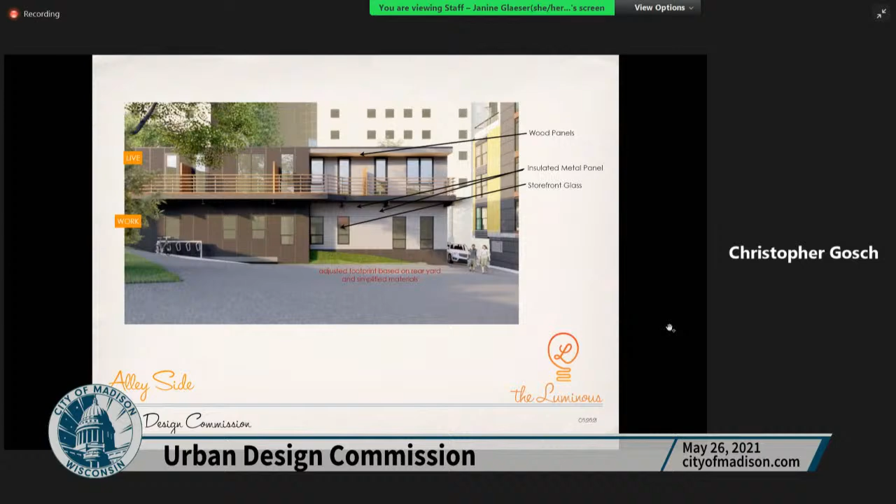I think go to the next one. Yeah, these are just the same ones you see in the interior, really hasn't changed. And I think the last slide, if we go down, is what we selected to replace the previous materials. So we do have a combination of 2 different insulated metal panels for the field.

Now the majority of this is glass. You'll see the bulk of the panel would be on the alley side and the rear side. We're just going to use storefront glass for the window systems, and that accent band would just be in Alucobond, a pretty vibrant material, with all concealed fasteners. One of our pet peeves is to not have exposed fasteners, so we want to make sure we have that.

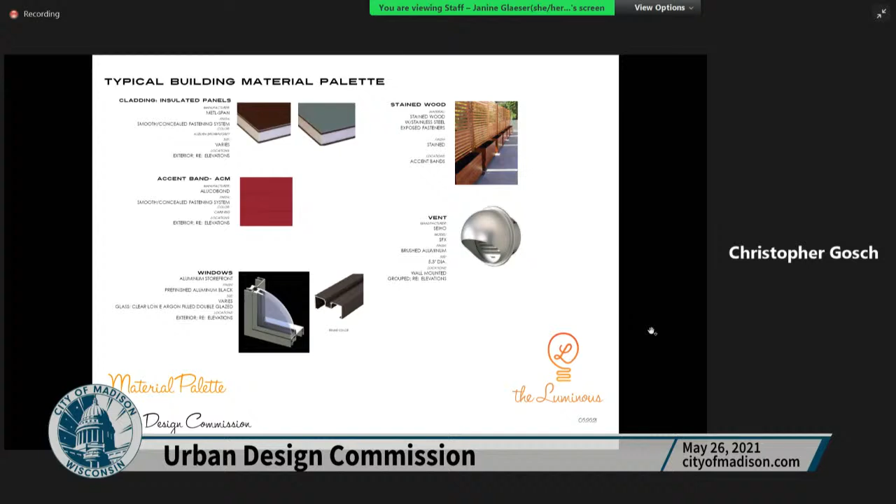And we just want to keep the palette very simple, very clean. One more, Janine. And then that area in red, that's where we had to bump the footprint back just a little bit. One more.

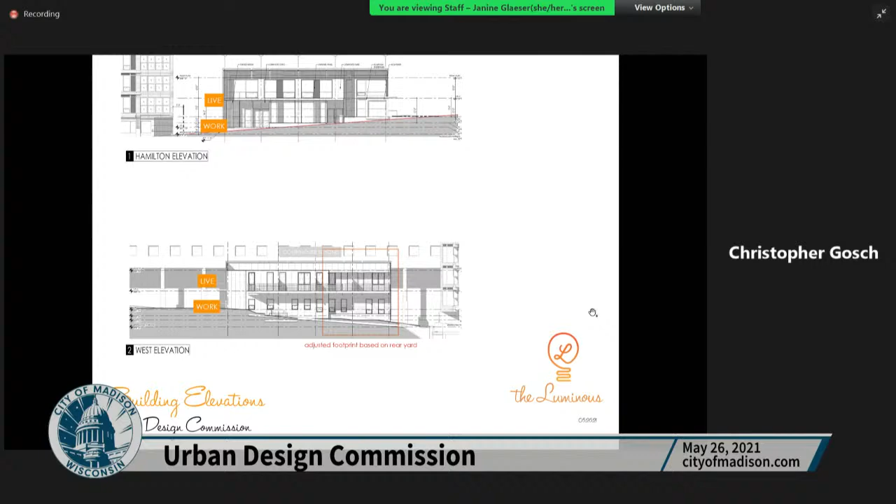Same thing on the second floor. Let's see, again, that's the alley side where we had to make that minor adjustment. And then I think if we go one more, keep going.

Yep, so we changed it to a non-invasive, more hardy bamboo that we would spread throughout the site, but we did get some additional opportunity to landscape back at that area where we're bumping in. So those are the major comments, or the evolution that we've had since March, and we're more than happy to address any comments or questions anyone has.

Okay, thank you. Are there any questions or comments with regard to the presentation or the design? Shane.

Thanks, so I still like the project very much. My only comment was about bike parking, and I know it's a very tight, limited site, but wondering if there was any opportunity to find a home for bike parking that's visible from the street. I'm wondering, maybe in particular along that south edge where you were able to sneak in a small amount of plant material, is there space for possibly a bike rack or two there, where anyone coming for commercial purposes who might be biking there could find a home without having to navigate to the back parking area? But otherwise, yeah, I very much like it.

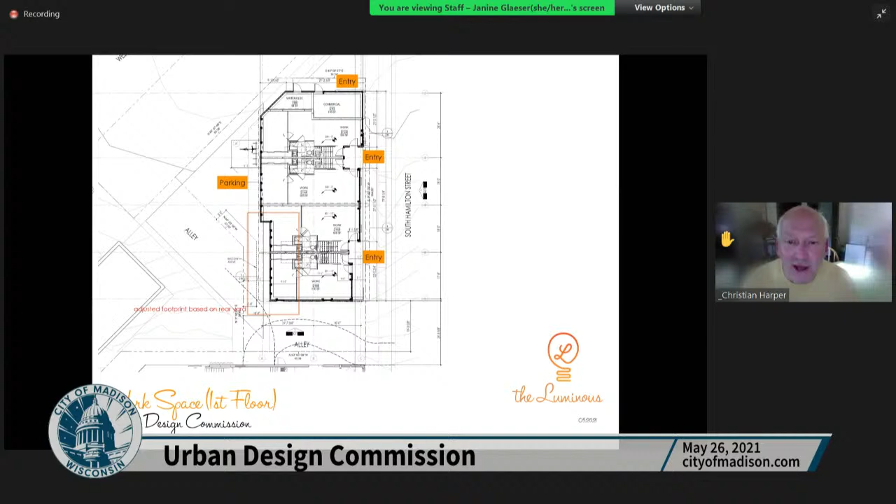Christian: let's go to the landscape plan. Are you able to see this, or do you want the full landscaping plan?

No, that's good. So I see that you took my advice about changing the bamboo species, but I'm still a little confused, and I think there was possibly just some oversights on this. I'm confused about what's going along the Hamilton Street side of the building between the entries there, and your renderings. I mean, I assume that was either open space next to the building or possibly built-in planters, but your renderings show just like a solid platform with people sitting on it with no plant material.

The upper part between the entry and the commercial area, you have 7 plants labeled F, and there is no F on your plant legend. I assume that those were also meant to be calamagrostis or bamboo, but the total numbers of those and the other ones don't add up on what's on your landscape plan.

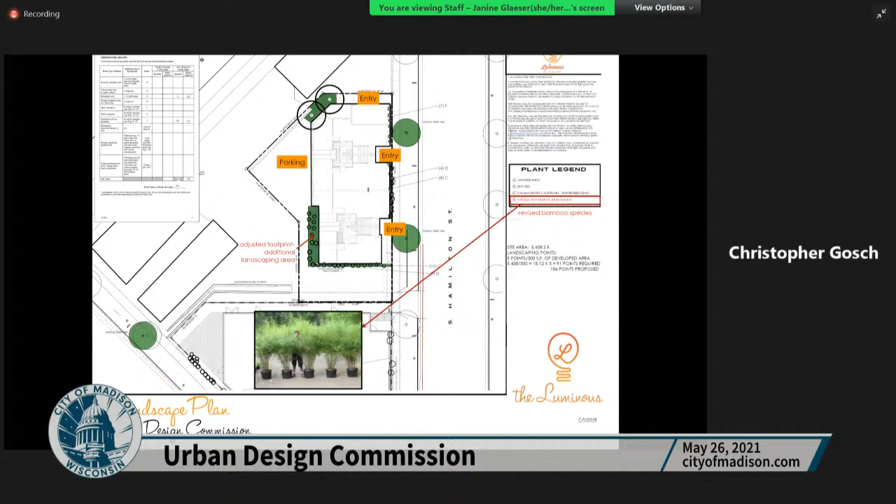Okay, well that's wider than I would have guessed looking at the drawings and the renderings. Okay, I'll go for it. I think you're going to struggle to have those plants behave the way that you think they're going to in that spot, but at least early on, before they try to outgrow their bounds and stuff, it probably will be an interesting architectural effect, but I guess we'll find out over a period of time.

I've also traversed up that street several times lately, just looking at it, and every time I go up or down it, it seems like it's always in shadow. So to the point of the plants and your comments about future solar panels on the roof, it's definitely a shady part of the city, especially with the courthouse looming to the east there, but I find it a very striking looking building, and I really like it. I wish you the best with your landscaping efforts there.

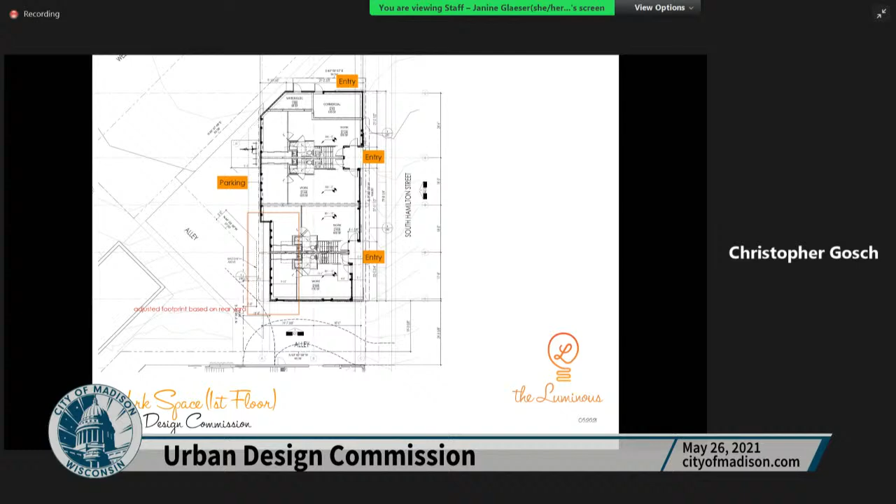So right now we've been discussing with the Savvy Cafe that's across the street. They have a full commercial kitchen leased with the county, and they have full use of that kitchen. During the pandemic, their cafe was closed for any walk-in or in-person business.

Their catering business took off, and then they started thinking about doing some subscription meal services. We talked to them about it, and it seemed like a really interesting idea, where we would just have a series of probably 8 to 10 lockers in there, and a customer would get alerted when their meal is ready, then go pick up lunch and dinner at the same time, or just pick up dinner and take it home.

So there wouldn't be any preparation in the facility. It would just be essentially a pickup spot for food. Got it. Thank you. Welcome.

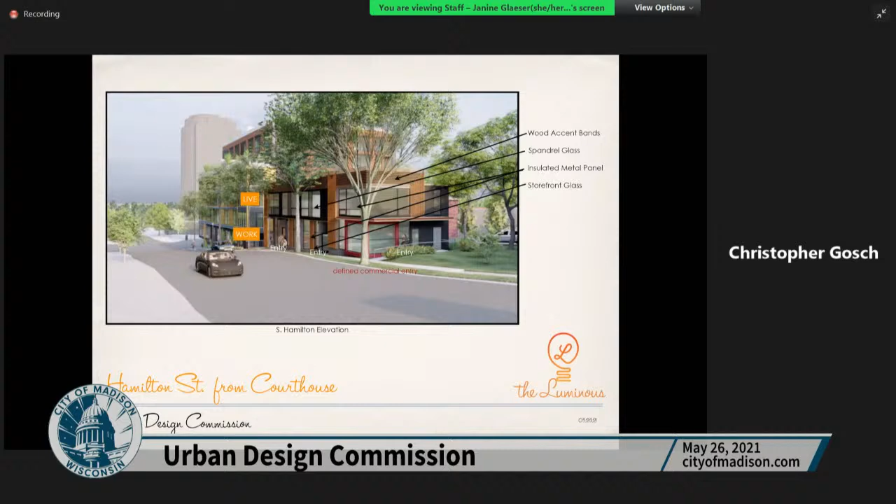We provided information before, and these have been addressed. There's been some good questions. Lois, I'll make a motion for final approval, taking into account the desire to have bike parking at the front of the building. And I think that was it, I don't think there were any other changes.

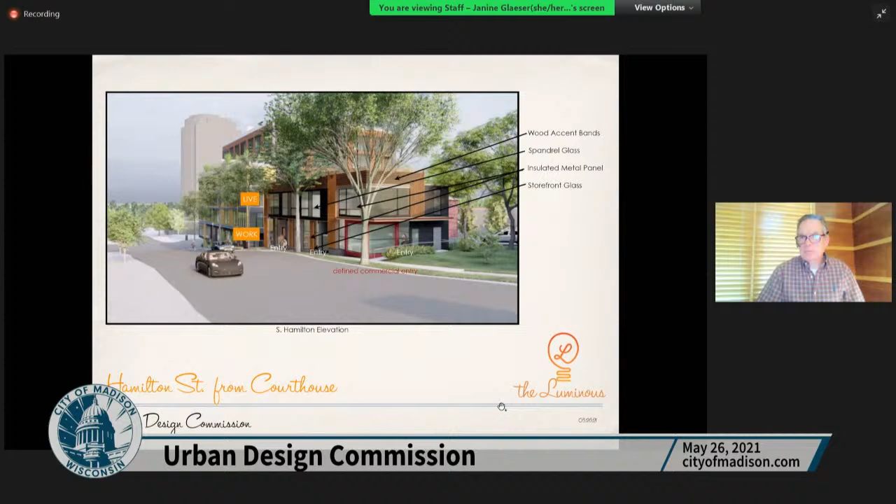Is that a second, Craig? Okay, any discussion on the motion? Seeing no hands raised for discussion, concern, or opposition, then it's unanimous. You've got final approval. Thank you very much. Thanks everybody, really sincerely appreciate it. We look forward to seeing the building.

Okay, that brings us to Secretary's report and business by members. Is there anything you'd like to mention, Janine?

Nothing specific other than, don't we have awesome IT staff that help us run these meetings? Yes, and also UDC staff, Julie Cleveland and Kevin Firchow. Round of applause. The applause is deafening. Thank you, seriously though, we do appreciate all the help and all the information that's presented and organized for us.

As a commission to review way ahead of time, it really helps, it makes our job a lot easier, especially considering we used to have these big, huge packets of plans over plans and staples, and binder clips and everything else. I mean, it seems like it was decades ago, but it's so much easier now in a lot of ways.